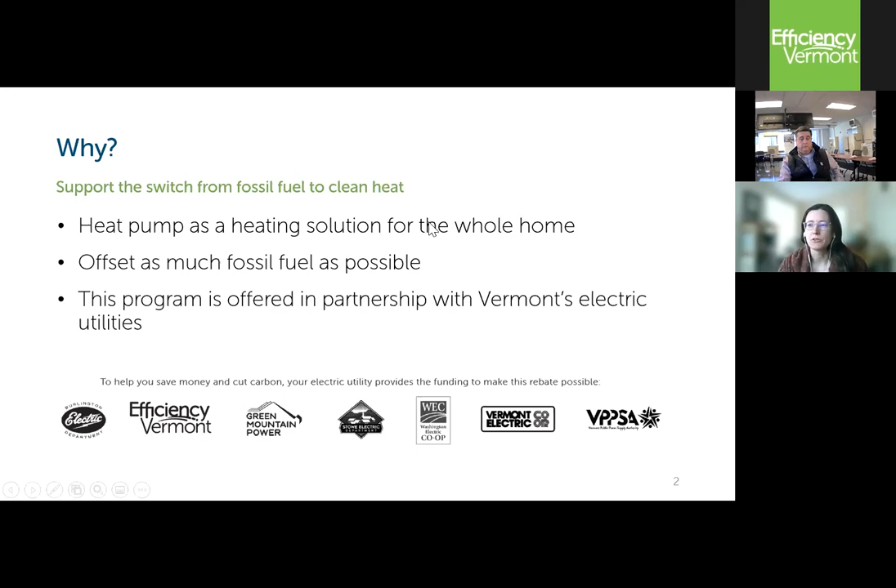First I'll start with some definitions so we know what we mean by integrated controls here. There are different names for that function - some folks call it auxiliary heat, and I think that's what Daikin uses. But what we've called integrated controls for this program are devices that can control both the ductless mini split and central heating system from a single device.

That device can switch between the two heating systems based on outdoor temperature or the temperature in the remote room away from the heat pump indoor heads, if that's needed to align with best practice guidelines. I went into that in more detail in the October webinar.

One thing I wanted to note briefly is that this rebate program is currently a limited time offer for 1 year or 100 rebates, which will likely get extended because we're off to a slow start. The hope is that with that limited time offer, we can get enough customer and contractor feedback to roll this into a full-scale program with a more streamlined approach around the rebate. I want to highlight this is a first step, and hopefully we can expand this into a more permanent program.

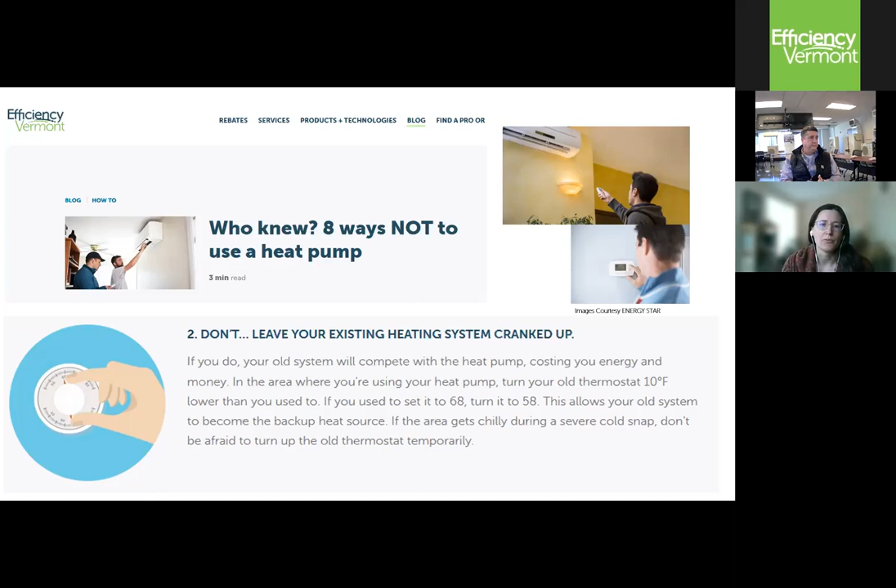You may think, I get what's in it for the utilities, but what's in it for the homeowners to tie that heat pump with the central heating system? Efficiency Vermont has a blog post you may have seen, 'Who Knew: 8 Ways Not to Use a Heat Pump', and tip number 2 is don't leave your existing heating system cranked up. Really, many Vermonters are not using their heat pump to its full potential for heating, and we can achieve more fossil fuel offsets by integrating it with the central heating system.

So the customer benefits in a nutshell would be, first, peace of mind. They can just set the set point on one single thermostat and not think about it anymore. The heat pump and central heating systems will take it from here.

The customer can feel like they're doing what's best for the environment, using the heat pumps as much as possible and reducing fossil fuel consumption. They also enjoy all the benefits of an internet connected thermostat with remote access, vacation mode, and all that. They can feel like they're the leaders using cutting edge smart technology.

One thing we can't really guarantee at this point is that they will be saving money. In most cases, from the calculations I did, it's pretty much a wash. In some cases, especially with natural gas, they might actually be paying more by using their heat pump more. So really the main benefits for homeowners will be peace of mind, ease of use, and feeling good about what's best for the environment.

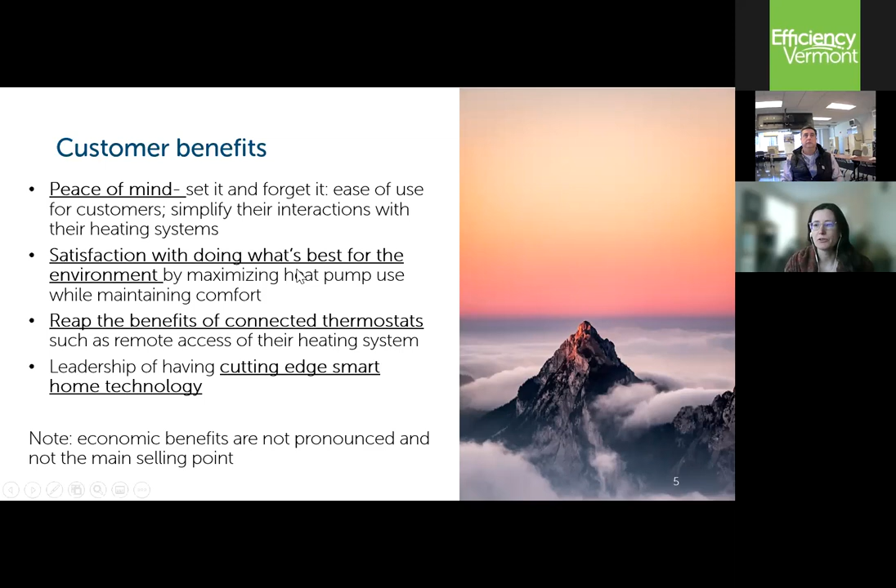So with this quick intro on why we're doing this, I wanted to dive into more of the details of the incentive program. The incentive that Efficiency Vermont is offering at this point is up to $600 per home to cover the device cost and installation cost. It's not $600 per thermostat, but $600 per customer. We ask that the customer pay at least $150 out of pocket, so they have a vested interest in the controls, that it's not a free device they got, but that they're interested in that control. The $150 is about the cost of a regular smart thermostat.

The incentive is currently for new ductless mini split installations, not for heat pumps that are already installed. And it's not available for ducted heat pumps at this point because that's already typically done for a ducted system, and we have a separate ducted heat pump incentive program. This is for oil, propane, or natural gas central heating systems. It's not available for resistance electric heat or central wood systems.

We also have a switch over temperature calculation tool, and I went into that tool in the webinar in October, so feel free to go back and look at that webinar for an overview of the tool. That tool helps you decide on a good balance point temperature for turning on the central heating system as a supplemental heat to the heat pump when it gets cold out, or if the heat pump can't keep up with covering the load.

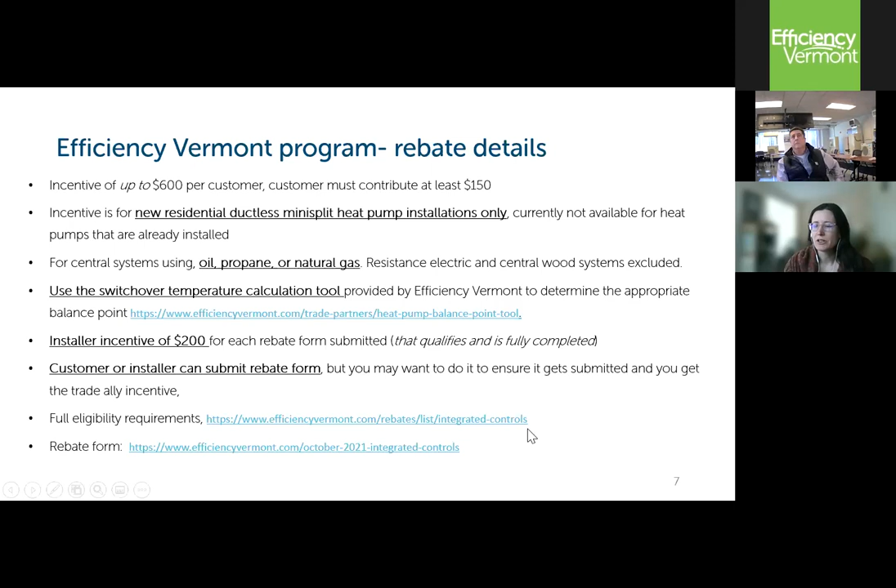There's also a $200 trade-ally incentive. So you can get $200 for each rebate form that you or your customer submits to Efficiency Vermont. Either you or the customer can submit that rebate form, but if you want to be sure that we get it, it might be better for you to submit that form so you can be sure you get that $200 incentive. I have a link to the full eligibility requirements here and a link to the rebate form, and I'll put those links again at the end.

Because this is kind of new, having those integrated controls where the heat pump and the central heating system talk to each other, we want to make sure we see quality installations, the customers are satisfied, and we get a good start to this new market. So we want to make sure that installers receiving the Efficiency Vermont incentive have followed trainings regarding the program, what we consider best practices for installation of the heat pumps, and really understand what are the risks and what makes a good installation for those integrated controls.

So to verify those trainings were followed, we're doing this through the EEN. If you're already an EEN ductless heat pump installer, you can follow the overview training that's linked on that webpage. If you haven't already, there's a really short quiz at the end that you can verify that you've attended it. I think it's 45 minutes total, the training, so it's pretty quick.

And then you would follow manufacturer's product specific training for the product you installed. This training you're in right now is one of them, so you'll have already done that piece. And then you would complete the EEN enrollment for integrated controls.

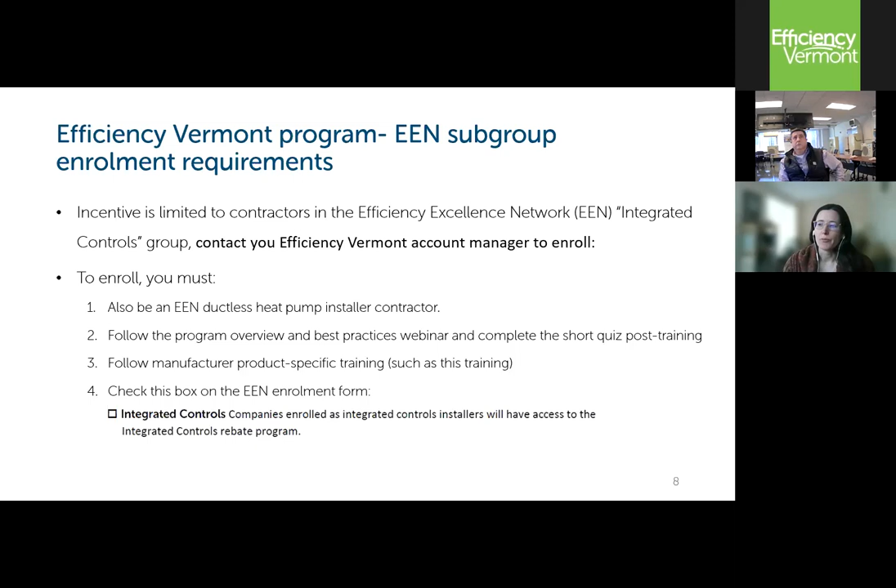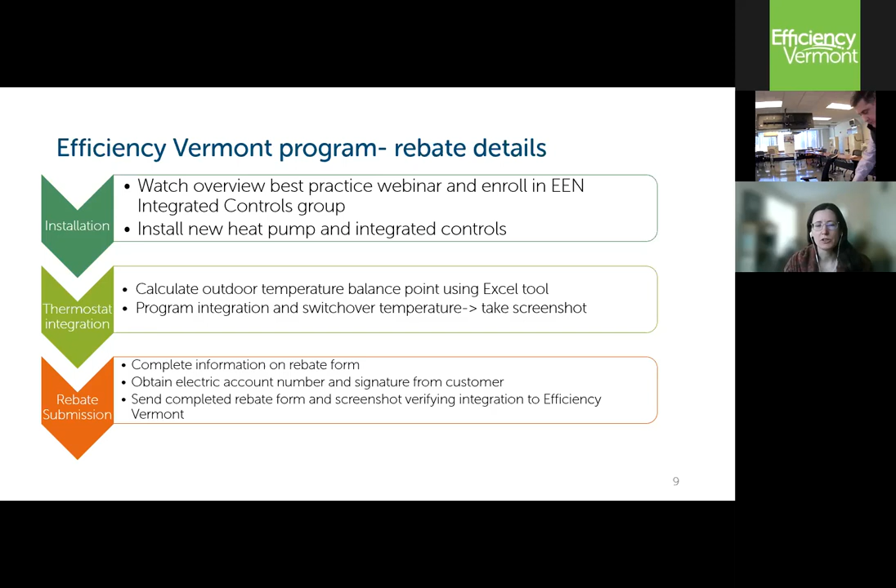So once you enroll in that EEN integrated controls group, to get access to the incentive you would install the new heat pump with the integrated controls, look at the appropriate balance point using the Excel tool mentioned earlier, program that integration in the thermostat, take a screenshot, then complete the rebate form and send it to us. You'll need to get the electric account information from the customer and their signature on the form, then send the rebate form to us with the screenshots. That's what you need to get the incentive either to the customer or to you, which is something you can choose on the rebate form. And you would also get your $200 trade ally incentive.

In terms of product eligibility, we've been focusing this incentive program on integrated controls that can communicate a demand call both to ductless mini split heat pumps and to the central heating system, prioritizing one over the other based on the outdoor temperature or the remote room sensor when indicated. We're also focusing on integrated controls connected to the internet so we can enable future demand response programs with the utilities. We're aware there are other options to do integration between the heat pump or central heating system, but we really wanted to focus at this point on devices that are connected to the internet. For full product qualification criteria, you can go on this webpage.

I just wanted to flag that the Daikin One Plus, which we're going to be talking about in this presentation, is definitely a product that qualifies for the program. Tom will go into more details on that, and that's it for me. Again, the link with most of the details on the program is here, and feel free to reach out if you have any questions.

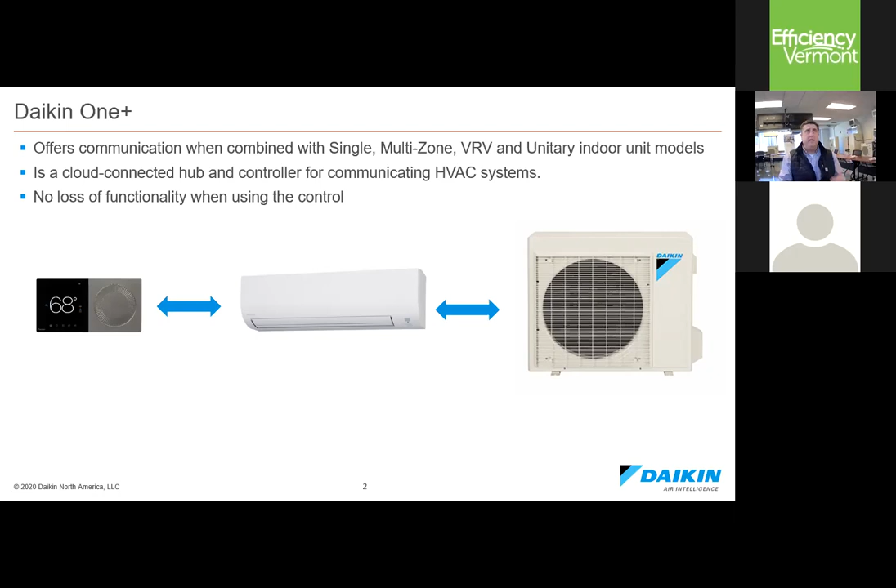So some of the other things we wanted to do when we developed Daikin One was to give a lot of the features and benefits that a lot of people may be looking for. Geofencing is a big one right now. Being able to use Amazon Alexa or Google Assistant is important to some people. Error codes that make sense, that pop up on the screen and will actually give a description of what may be wrong.

Remote access from the app is one of the biggest things, right? We are able to take a phone app and mirror the controller. So almost everything I can do standing in front of the controller, I can do from the app. It's just kind of cool. And again, we want to do that without losing any functionality of the control.

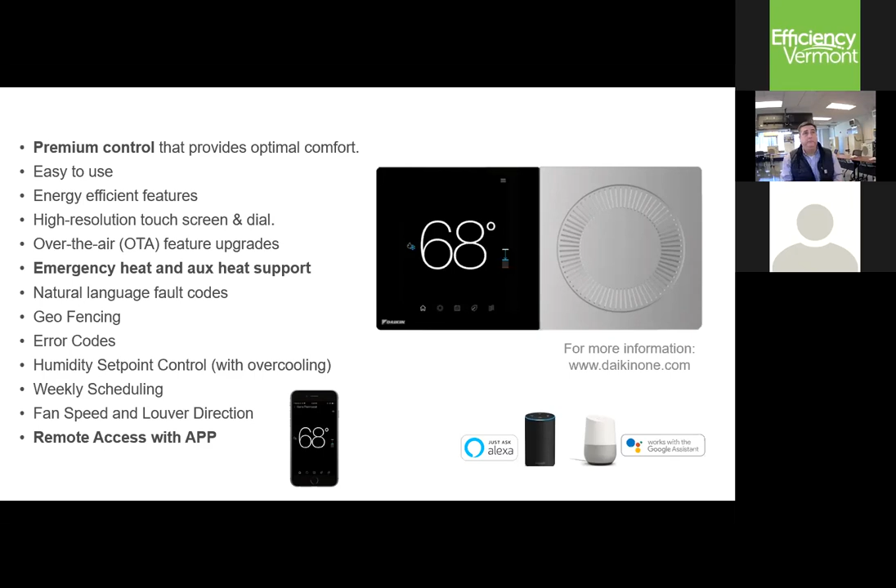So along through this presentation, I'm going to talk about S21 and P1P2.

These are two different types of how the controls wire. S21 control, the best I can describe it, uses a Molex connector on a set wire that'll plug into the S21 terminal on the board. Most of our wall mount units in our ductless and multis, you're going to see this in the floor mounts, the Emura. We also have our low static ducted, that's an S21 control.

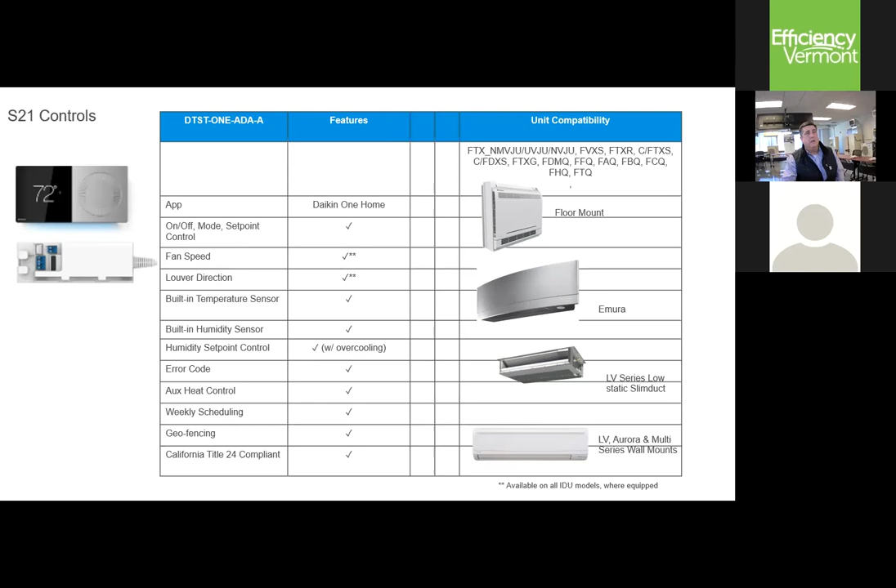I'm also going to talk about P1P2. P1P2 means you have two wires running between the controller and the indoor unit. They should be 18 gauge stranded non-shielded cable between those two connections. So P1P2 is a 2-wire connection, not a Molex connector. You'll see that in our ceiling cassettes, mid-static ducted units, in the Sky Air line, our VRV line, and our VRV Life line. You're going to see the P1P2 controllers there.

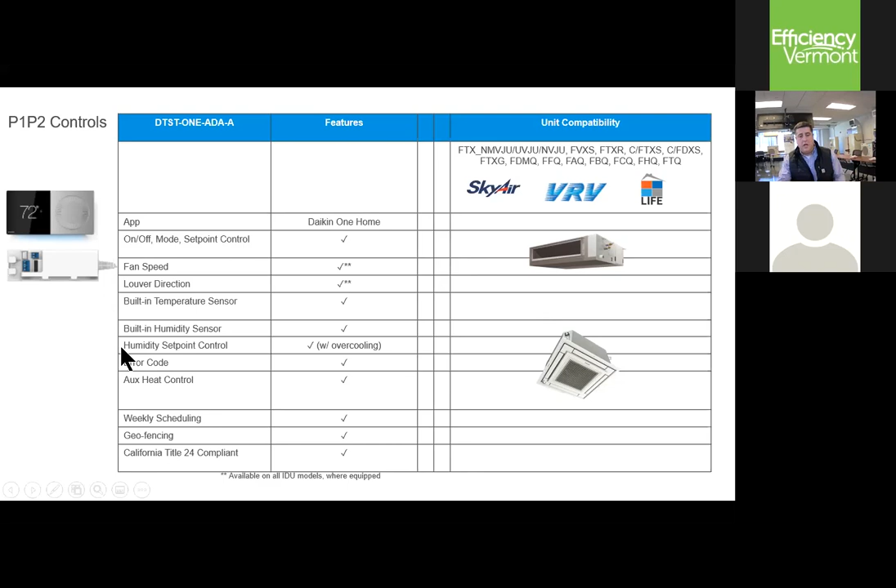When it's used in the unitary products, you won't need S21 or P1P2, because we have an adapter, I'm going to show that in a second, that will be able to help tie this into everything across our line.

So the controller has two ways of controlling. There is a dial, so that this area right here spins, and you can turn the temperature up and down. You can press it, and it will bring it to the home screen. So that's one way to be able to change temperature and change the settings.

The other thing you can do is come up to the controller and just touch the screen. The look is a little different. You used to have to go in and click this little round thing that mimics the dial, touch it, and be able to change temperature up and down. If you tap the screen now, it'll bring you to a screen where you can change temperatures up and down just by dragging your finger. You can also touch the mode, right here, and change your mode to heating, cooling, or auto. It's pretty simple and easy to use.

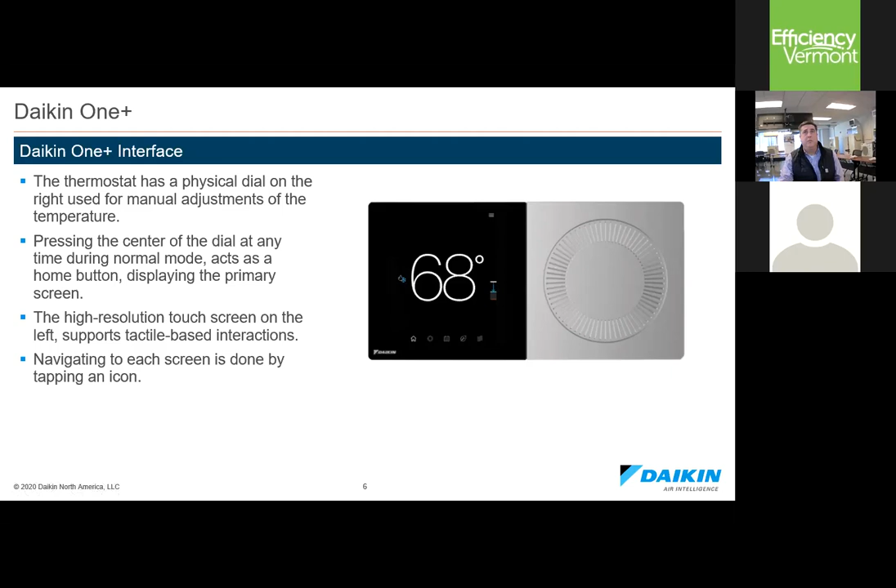You'll have 4 types of messages, and they come in different colors so you can differentiate them. When you see red, that's your status - what is the system doing right now? Alerts are going to be in yellow. White is just a reminder or a prompt, asking what you want to do next, especially in setup. And in a grayish look, you can click on that and it'll give you tips and suggestions on how to use the control to optimize it for your application.

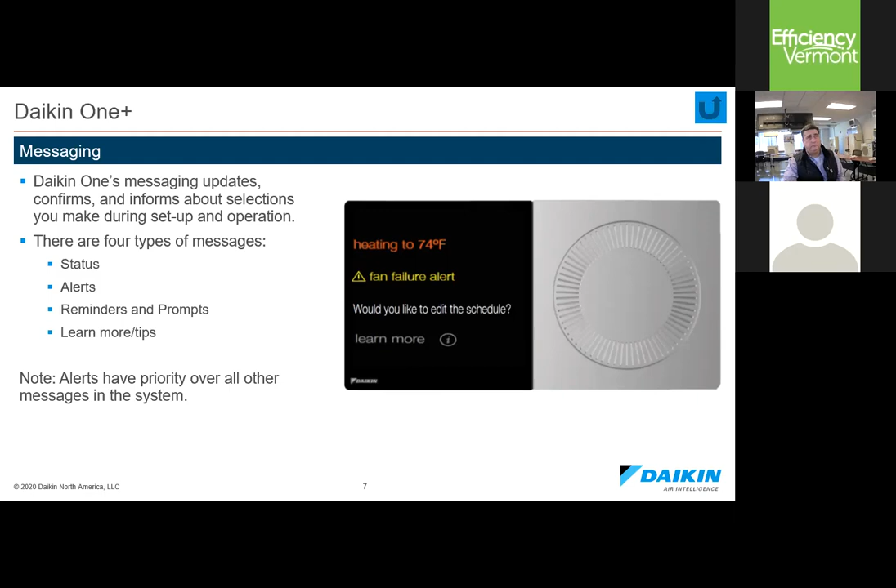A lot of the alerts that might pop up, the homeowner might be able to just dismiss. Obviously there are some prompts, like the fan failure that popped up on the screen there - if the fan has actually failed, there's nothing we can reset, they're going to have to call and get it fixed. But there are some minor faults that will pop up and you can just reset the system and continue on.

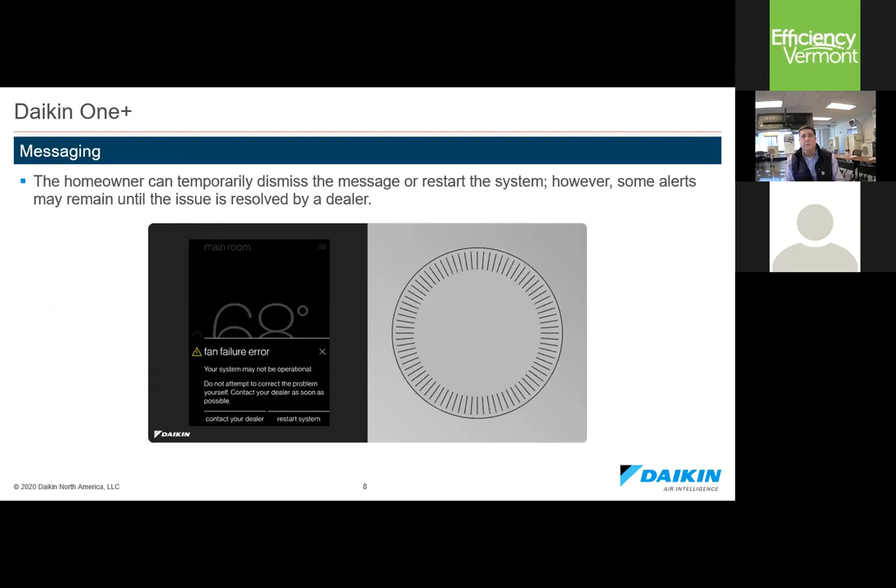So in the box, you're going to get the Daikin One stat. You're going to get a backplate for it. You get an optional trim plate. What you also get is the translator.

The translator, and I'm going to show you how to wire it in a minute - this translator will be able to translate to that S21 or P1P2 connection. That comes in the box along with the S21 cable, because that is just a Molex connector. When you use P1P2, you'll use non-shielded 18 gauge stranded wire between the translator and the indoor unit.

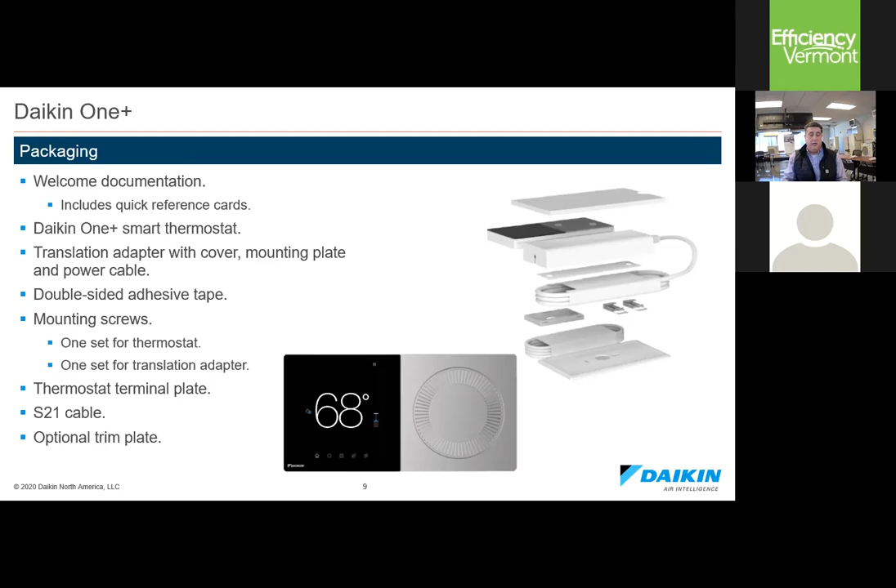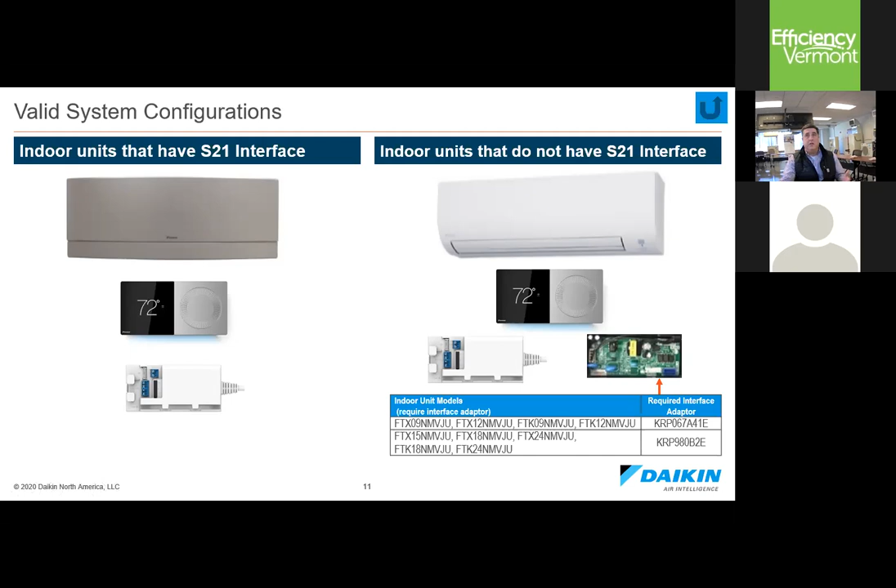Most of our wall mounts have an S21 interface. There are some units, like our 17 series, which do not have an S21 interface. With those, you're going to have to add a KRP board to the indoor unit to be able to tie directly into the S21 off of the translator. But most of our indoor units that you'll be installing will tie directly with an S21 clip.

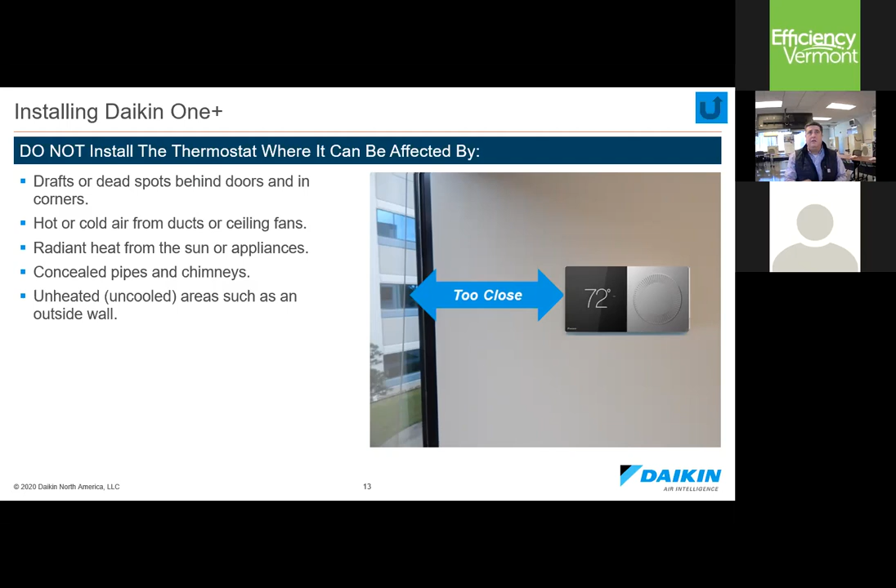So installing the thermostat - common sense, right? We don't want it with a light shining on it. We don't want it close to the TV. Any sources of heat that might affect the operation of the thermostat. We want it on an interior wall, not an exterior wall. Simple things - you guys have been installing thermostats for a long time probably, and the same rules apply to this controller.

About 5 feet off the floor. You may have some restrictions that might need it lower. It should be leveled - it'll operate without being leveled, but you want it to look nice and straight.

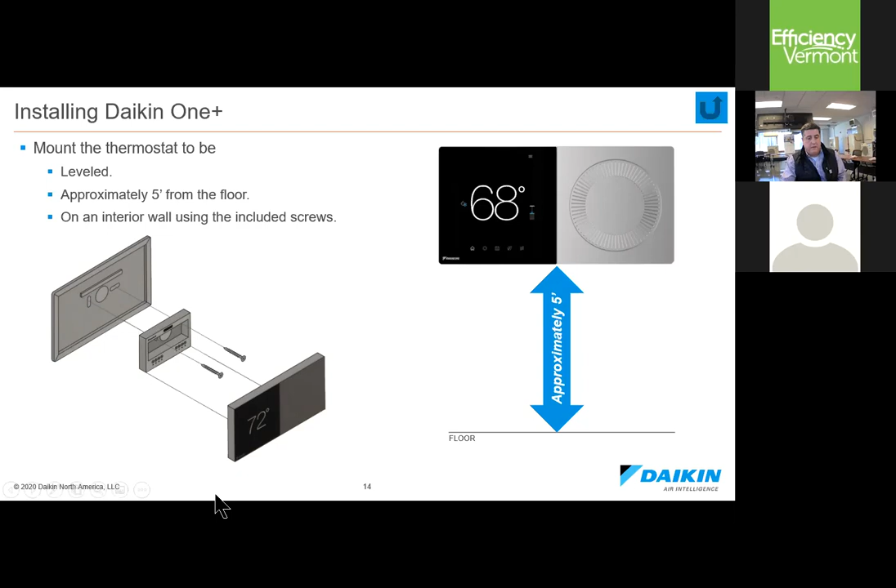The question we always get is, where do I put that translator? You can put it above the unit. You have a 6-foot cable for S21, so it would have to be within 6 feet from the indoor unit. It will mount in the pipe chase back here in a wall mount unit.

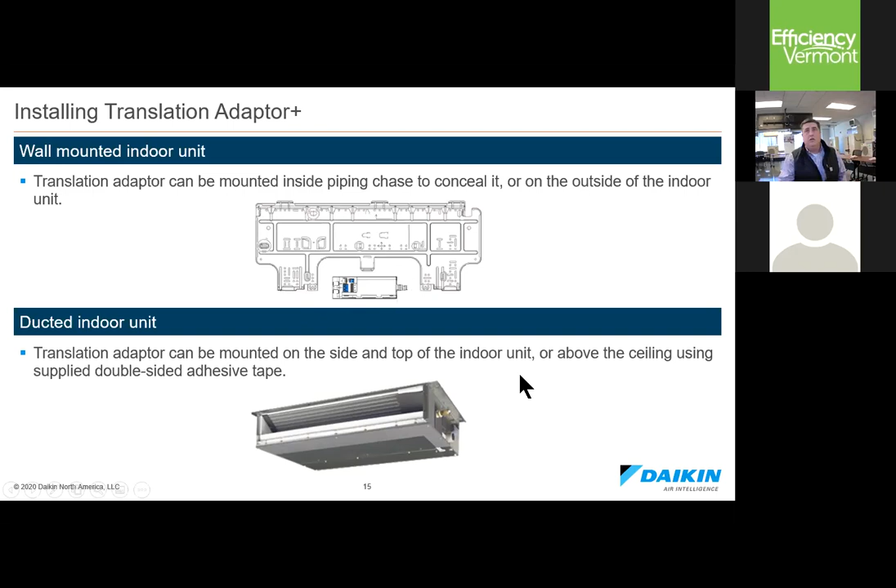A typical duct mounted unit, you're going to mount it - there's double-sided tape that you can use to mount the translator adapter to the ducted indoor unit. Again, we don't want you putting screws in the indoor unit. We don't want to let any gas out or any smoke out of the board by drilling into the wrong spot on the air handler. It does come with adhesive tape - you're going to put it on there, push it on, apply pressure for about 20 seconds, and you should be good to go.

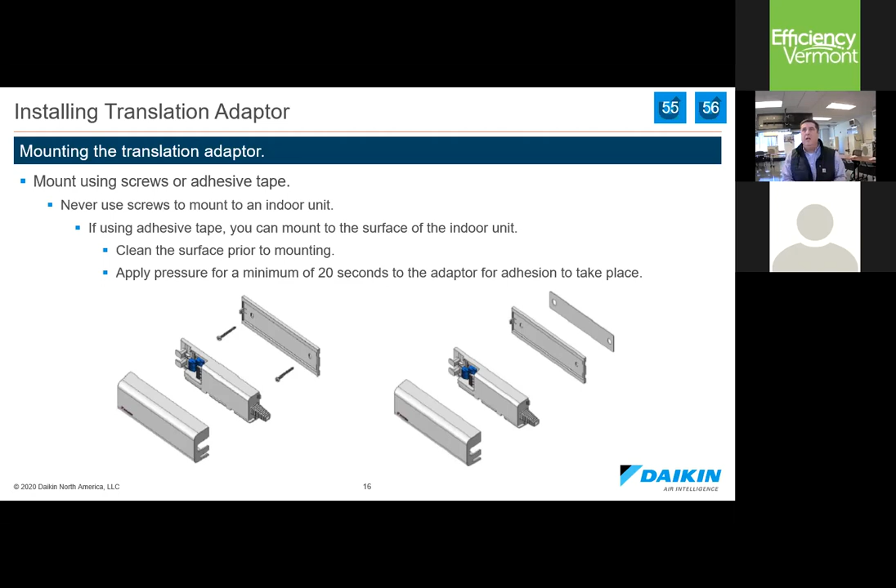The Daikin One does have some restrictions as far as the amount of wire we can put on it. The maximum distance between the Daikin One and the translation adapter shouldn't be more than 125 feet.

One thing you typically don't hear from us in the ductless world is that when you go from the thermostat to the translation adapter, you can use solid wires. You can use typical 18-gauge thermostat wire between the thermostat and the translation adapter. In fact, it works better. These connections are a little tight, and when using stranded wire, you really have to twist it tight to get it into the hole where you're tying it in. So solid wire actually installs a little easier.

When you have the whole thing wired and powered and ready to go, one thing you may want to check is that you have 0.6 volts DC between 1 and 2, your data lines. And then that you have 24 volts DC between R and C. You just want to make sure that you have that there to verify your wiring, because you don't want to get the whole thing ready to go and then find out you need to run new wire because of a problem with the thermostat wire that may already be in the wall.

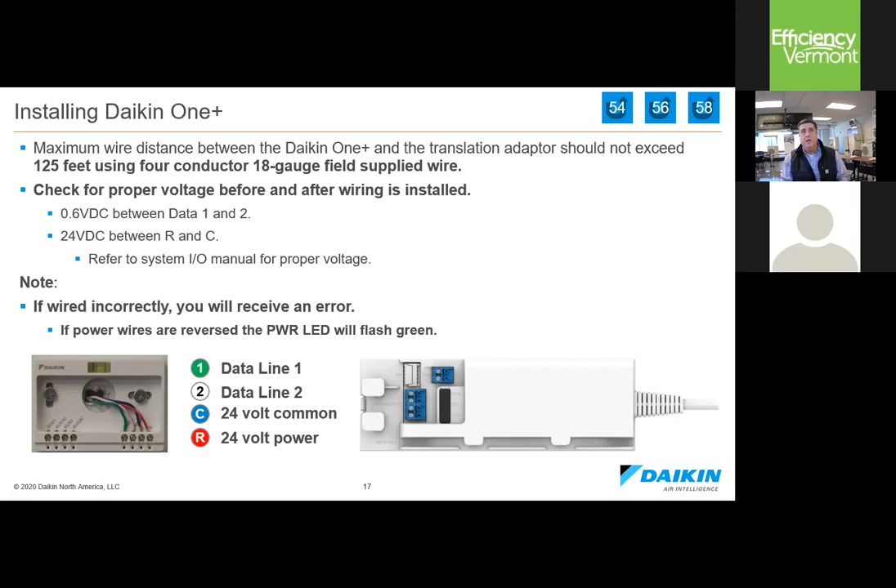This is showing the S21 connection. We're tying into the indoor unit here with our line voltage. We have our 4 wires running from the Daikin One plus the translation adapter. Then from the translation adapter, we have the Molex connector that will snap into the S21 connection on the board.

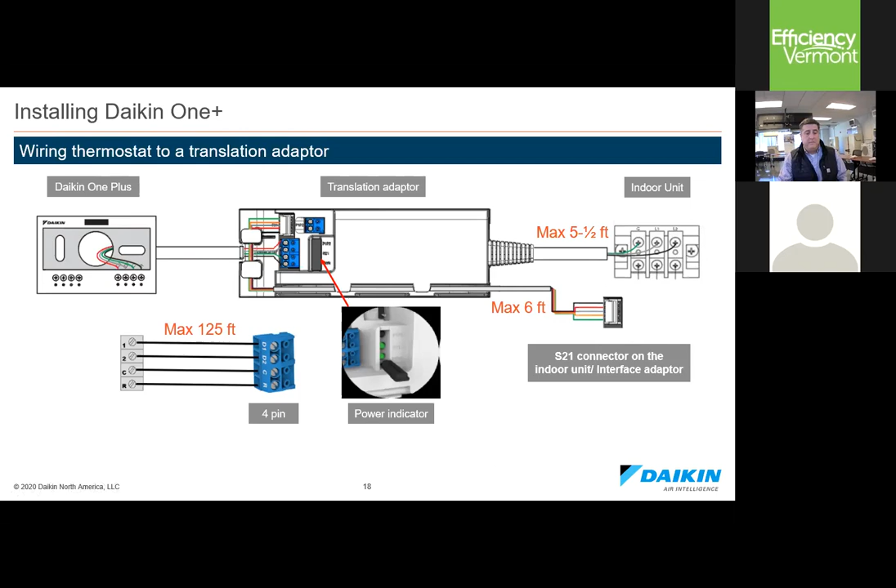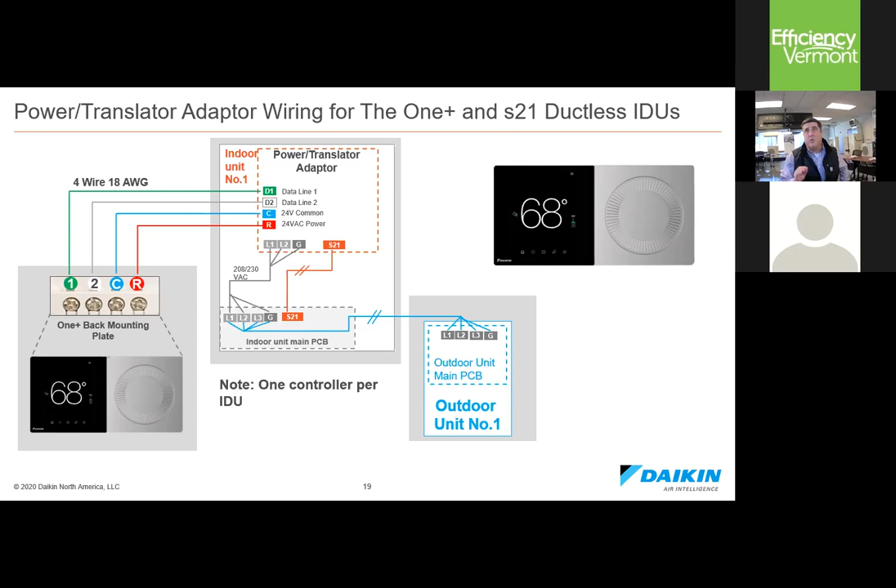Just another look at how the translation adapter and the whole thing is wired on an S21 application. Especially in an S21 application, you're going to want 1 thermostat per air handler. Even in P1P2, we recommend that. It can be done with 16 units, but that may get confusing within the install, making it a little more difficult for the homeowner to understand the control of it.

There's line voltage, P1P2, 2 wires tying into a unit from the translation adapter. And again, a maximum of 125 feet of 4-wire, 18 gauge going from the thermostat to the translation adapter.

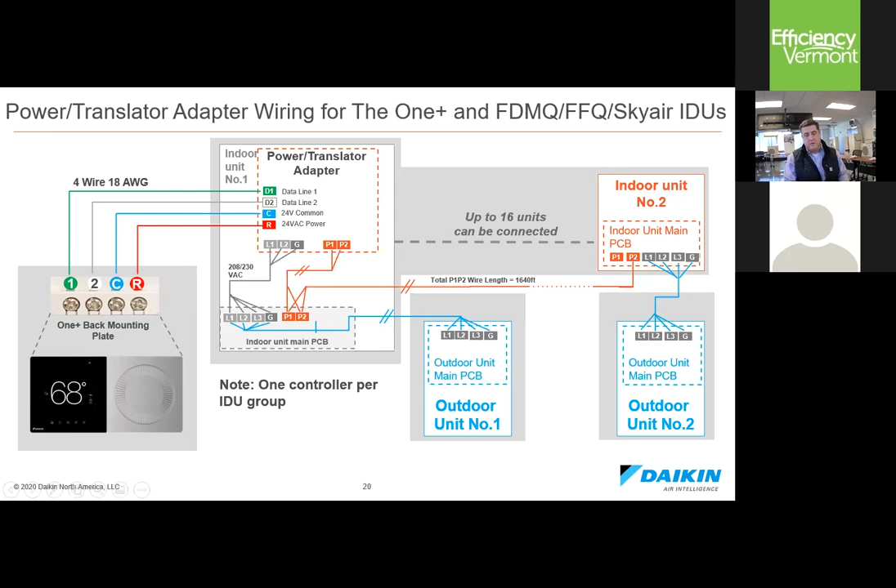So I guess this is the reason why we're here, right? To talk about how we will wire this in as an integrated control.

The great thing about Daikin One is that we made this extremely easy to do. On the sub base, there are auxiliary terminals, auxiliary 1, 1C, 2, 2C. All you're going to do is tie these in. Basically these contacts are just a set of dry contacts, no power to them. They're going to open and close based on the parameters that you put into the controller. We're going to show that in a minute.

We're going to tie this directly to the auxiliary heat, whether it's the board or the boiler directly, a furnace, whatever it is. This could be a hydro coil, whatever your backup heat is going to be for your auxiliary heat. That's all we're going to do, use this set of dry contacts to tie that together.

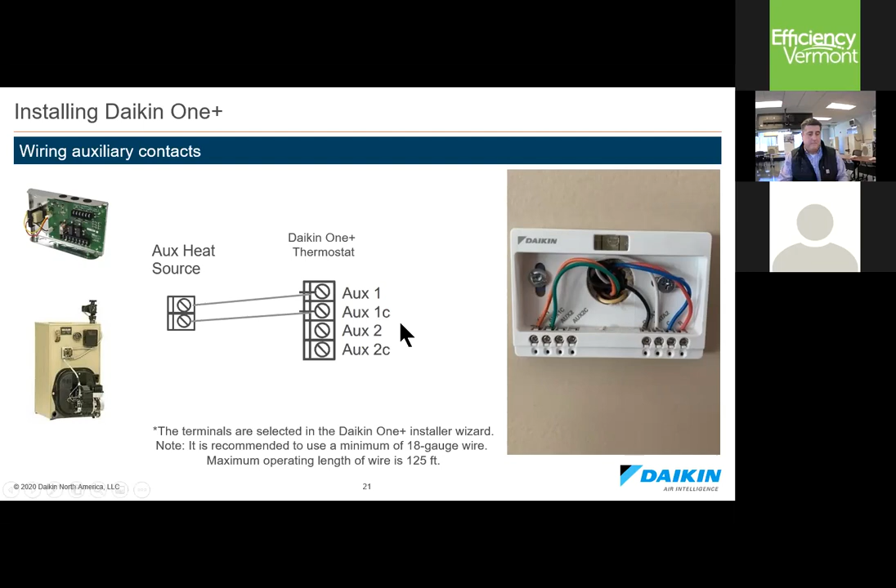Just a second, I'm clicking a little too quick here.

So any questions at all on wiring? It is pretty simple to wire. There shouldn't be any surprises with it. It's pretty cut and dry.

Okay, so the commissioning of the control. The other thing I really like about the Daikin One controller is how easy it is to go through the setup, because it's going to prompt you through. It's not going to be like our typical VRV controller we've had for years, where you need a certain code and try to figure out how to work through that. This is going to be a lot easier, in clear language on how to set this controller up.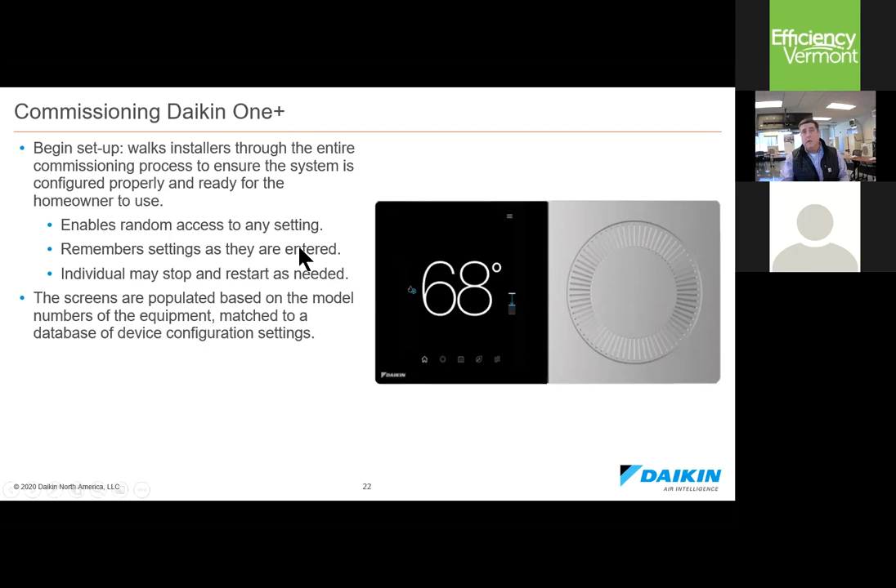Upon startup, it's going to walk you right through the process. It's going to ask you the language, if you want to use large font. It's also going to ask you what type of equipment, and this is important when we talk about the S21 versus P1P2. If it's a unitary piece of equipment, a standard furnace, or one of our Daikin Fit units, you're going to click unitary. If it is typically a wall mount, something like that, it's going to be S21. If it's P1P2, you're going to click on VRV, Sky Air, P1P2, just so the controller knows what signal it's going to have to put out there.

And easily click, begin setup.

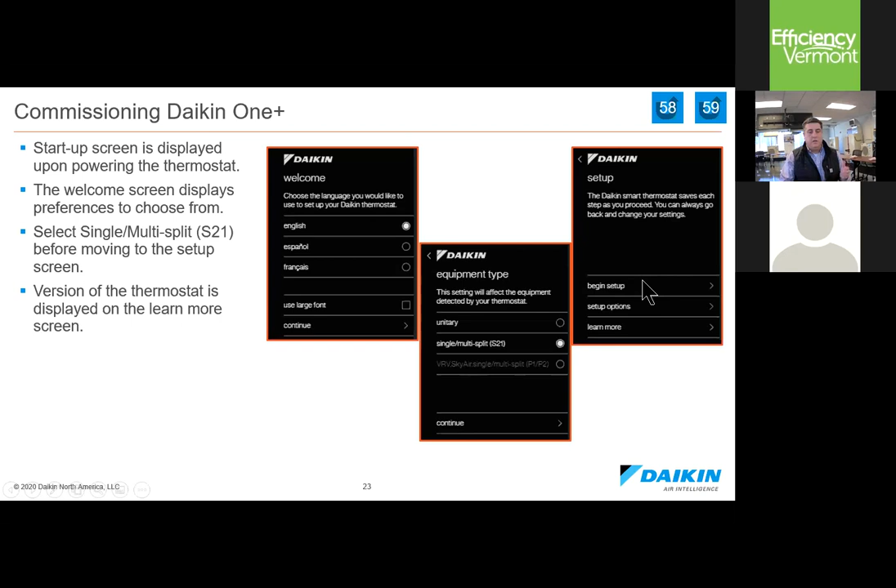From there, it's going to give you a 5-step process. As you go through this process, there are going to be check marks that check off each one: communication, personalization, equipment setup, system optimization, and preferences.

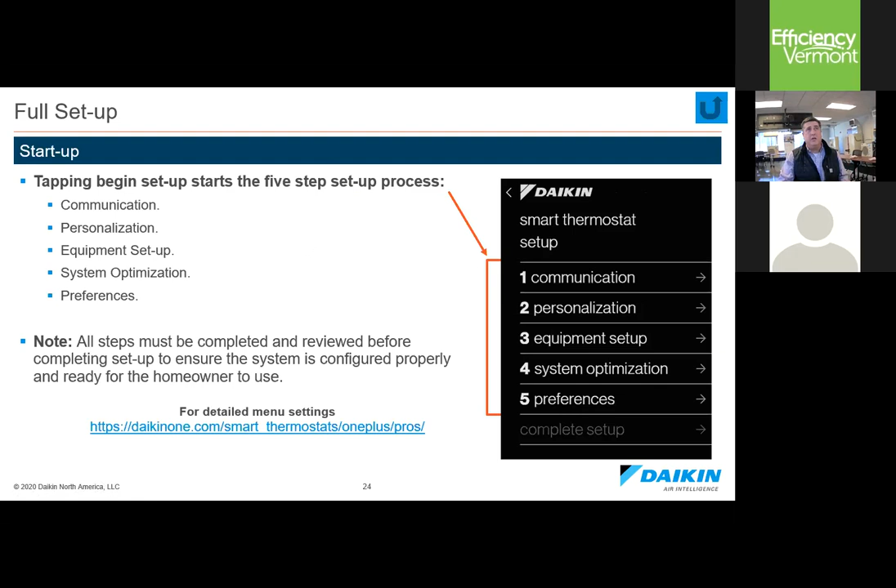So you want to start with communication. The first step you want to do, and I know some installers want to just go ahead, get the equipment running and move on, but it's important that we go in and set up the Wi-Fi first. The reason we want to set the Wi-Fi first is that if this controller has been sitting on the shelf a while, it doesn't have the latest software version. Once we tie this to the internet, it'll go out, look for its updates, and automatically update to the latest version. We want to make sure we have all the functionality, all the features and benefits that we could possibly get with this controller.

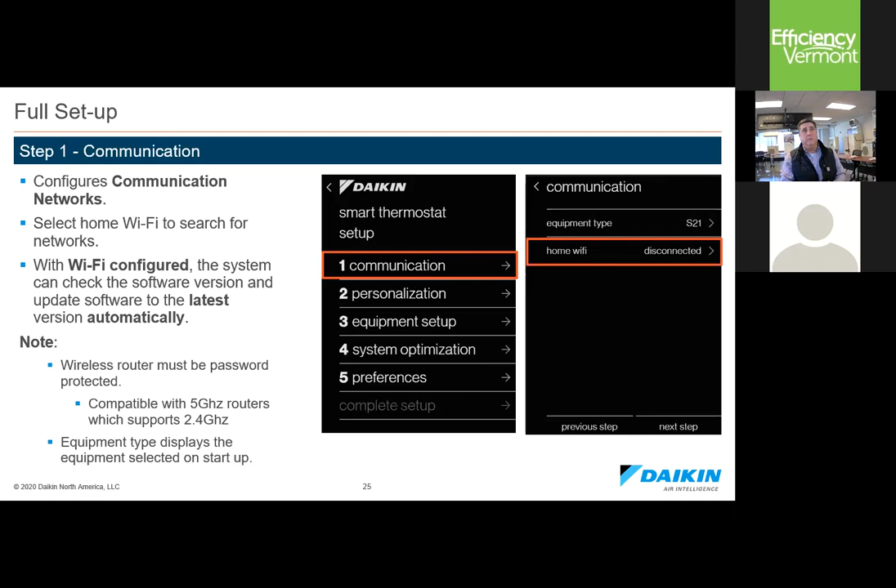You go to personalization. You're going to set your language. This is where you're going to set your date and time, to make sure that when they do the scheduling, it all works properly. You can name the controller, and you can set Fahrenheit or Celsius right here.

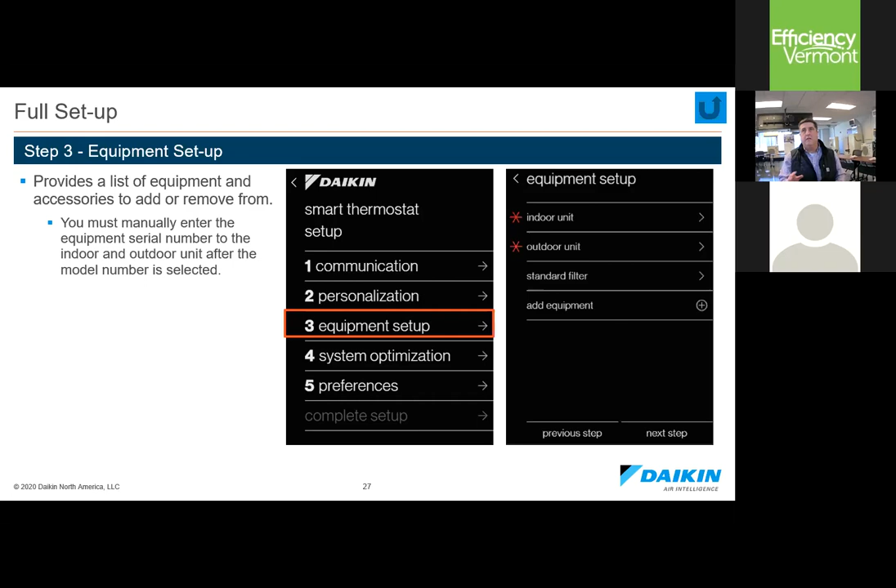When you go to this setup screen, it should tell you the model numbers of the indoor and outdoor unit. If it does not, you may have a communication error or communication problem, and might have to go back and check wiring, but it should pick it up. The one thing you do have to do is enter the serial number of the unit. That is not picked up directly through the boards, so you will have to put that in there. Then hit next step. So again, indoor and outdoor unit, add the serial numbers.

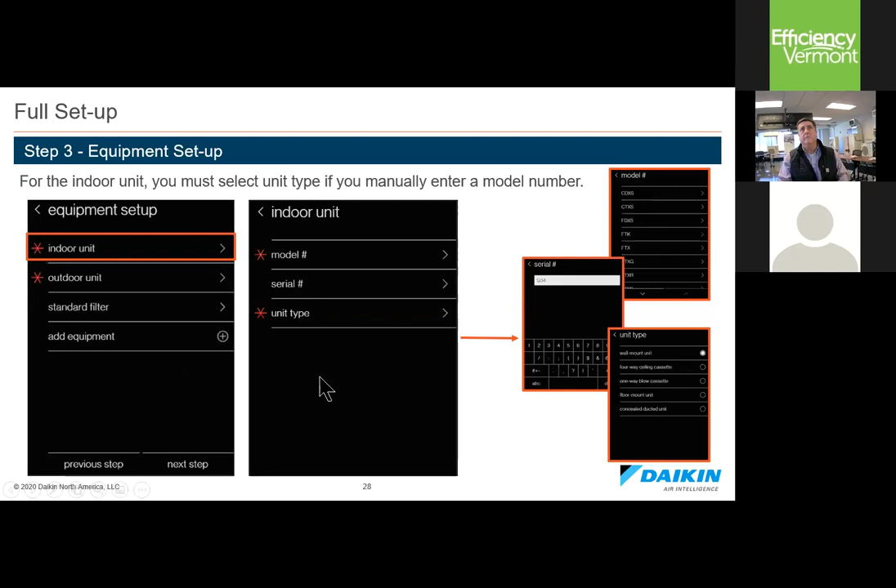So now we're going to come to this screen for add equipment. This is where we're going to set up that auxiliary terminal. We'll go in, click add equipment, and pick what we want to do—we want to pick auxiliary heat source. You can pick at this point if the heat pump is a primary source of heat or a secondary source of heat. It is possible—I've seen some applications where someone might have solar hot water that they want to heat with, use that as the primary source, and have the auxiliary heat pump as a second source. Then we can set up another source with the aux2 terminals to set up another layer of auxiliary heat sources.

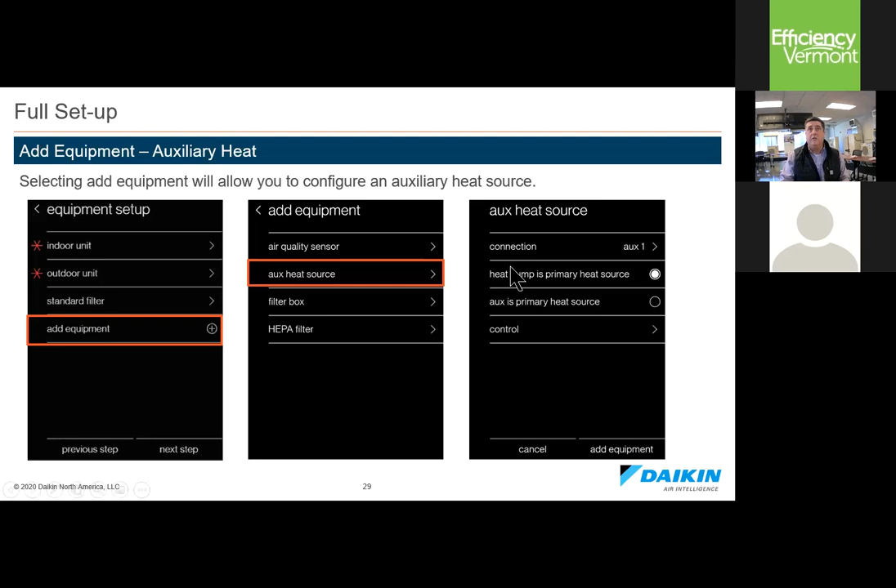So we're going to go in here and it's as easy as this: heat pump lockout, set it up, auxiliary heat lockout, and the differential you want to set up. It is absolutely that simple.

Hit next, you go to the next screen, system optimization. You're able to calibrate the stat at this time, but I would wait—we recommend this—at least 30 minutes. Let the thermostat equalize, let it figure out some things about the house and what it needs to do before calibrating the stat. But it can be calibrated through this screen. This is also where you're going to go later on to look at your error history. You'll be able to come in here to system optimization and look at error history.

Then in preferences, you can set up optimize performance, put in dealer information, and set up reminders. We can put our set point deadband, to differentiate when we get in auto mode—do we want a 3-degree difference between heating and cooling? We can set that up here. We can also set up overcooling to dehumidify—based on, say, a humidity over 60%, we can set this up from 0 to 3 degrees to overshoot the space to add a little more dehumidification just by overshooting the temperature. That can be adjusted here.

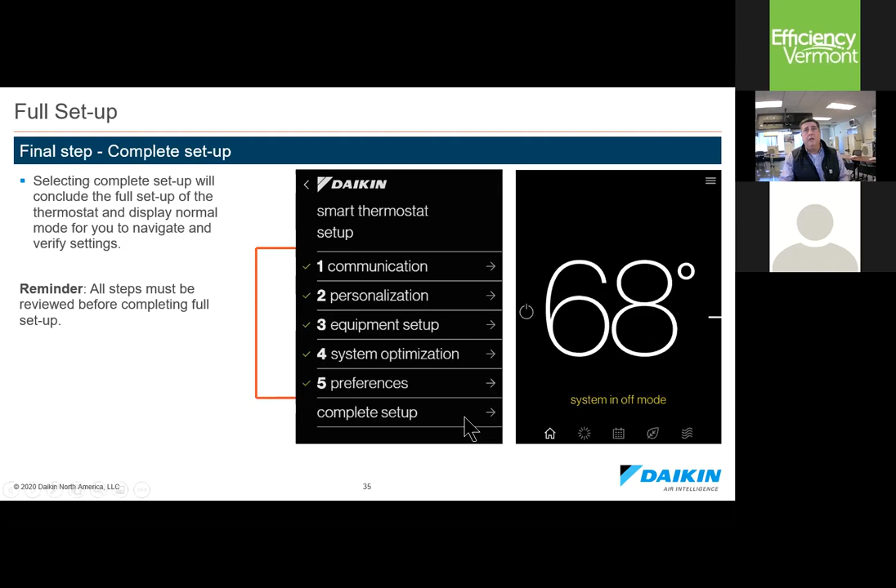So again, when I'm going through this controller, I would make sure that I go from top to bottom. You don't want to go back and try to figure out, okay, where did I leave off, what didn't I do, right? Try to go through it, 1 through 5. It doesn't take very long to run through the whole thing. Then you can hit complete setup, right?

So you hit the setup, you're done. Either you want to go back later and change something, or you're standing right there and say, oops, I forgot to do something, right, I want to change something. You'll go in up here. I believe it's over on the other side now, the waffle, this little waffle up here. You click on the waffle, you go into settings, and you can click configuration, dealer edit, and then hit continue.

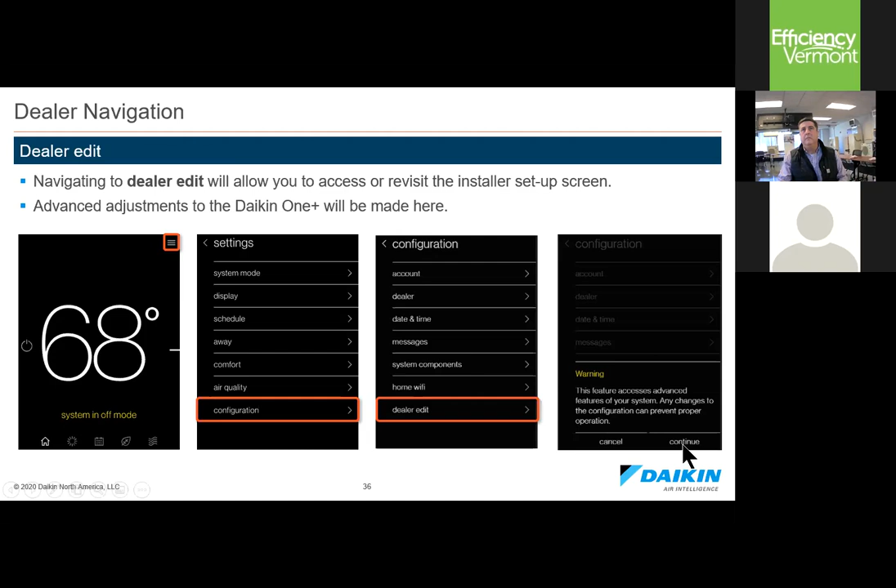It's going to ask you for a 4-digit PIN to unlock the thermostat. If you don't know or remember what this is, you come up here and hit this little icon to the right-hand side, and it'll give you that code. You put it in here, and you're back to the thermostat setup screen.

So if you wanted to go in and change any of the temperature changes from heating to cooling, right, if you decided that they want to optimize it and do it at a different temperature, optimize savings or whatever, whatever you want to do, you can go back in later and set that up.

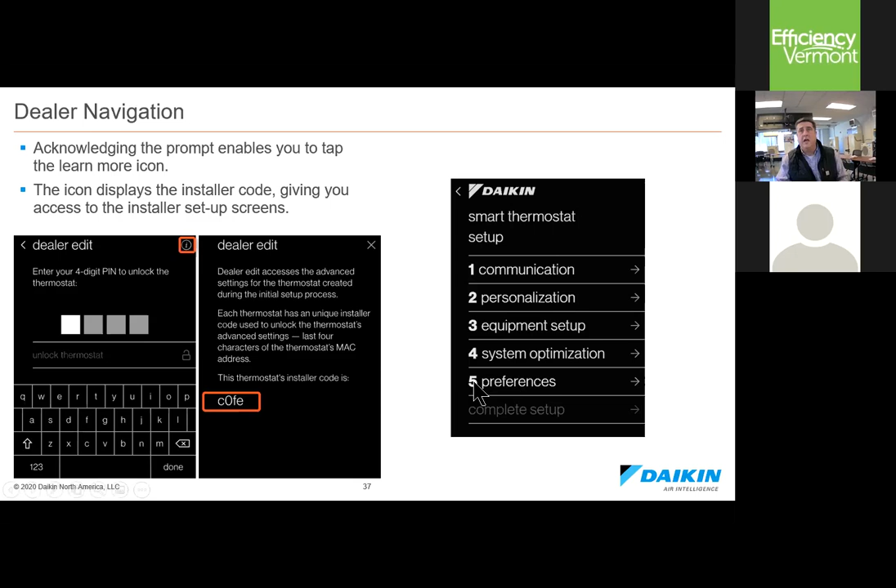All right, so when it's just running in normal mode, it's going to look like this, right? They can navigate the controller then by going up and just touching the screen. I should have an updated picture of this, it looks a little different. So now, let me go back.

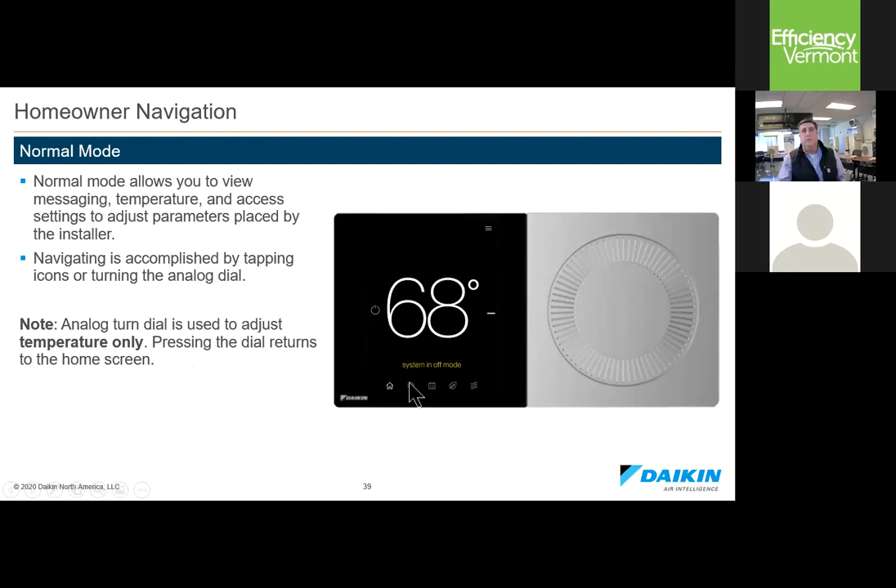Now when you go up to the screen and touch the screen, right before you had to go in and click this little button, this little icon here, right? You have to touch it. Now, if you touch the screen, it will bring you directly to this screen here, and you can automatically go up and adjust temperature up and down. And like I said, you can go and touch this little icon, and that will be able to change your mode from heating, cooling, or auto.

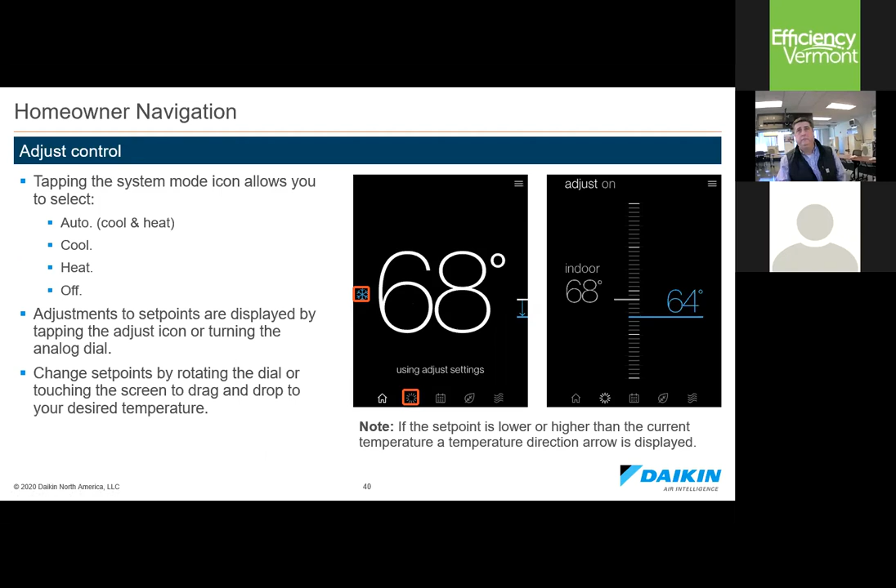This is your away screen you'll be able to go into, and this is where we can set up geofencing. So when we are away, and your phone senses that the app senses you're beyond the circle that you're going to put in for geofencing, this is where you'll be able to set your temperatures for the away mode.

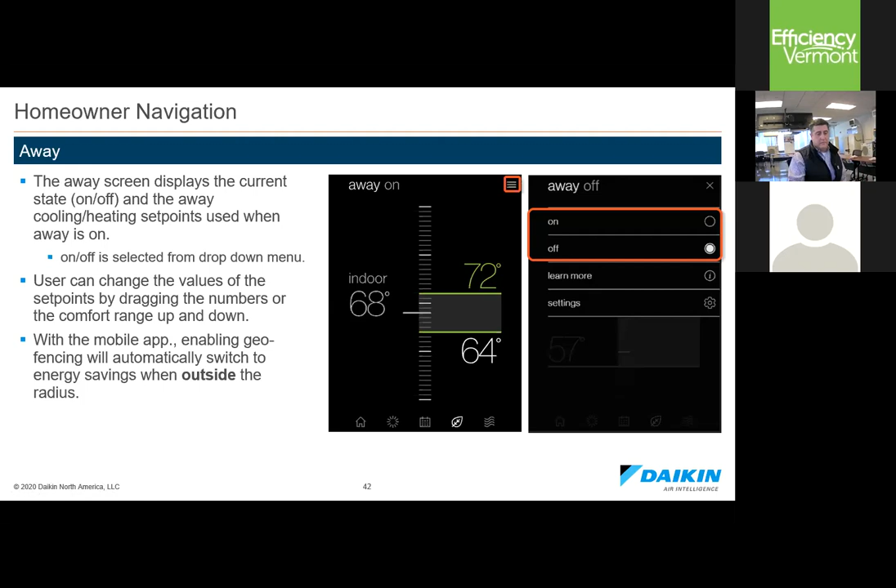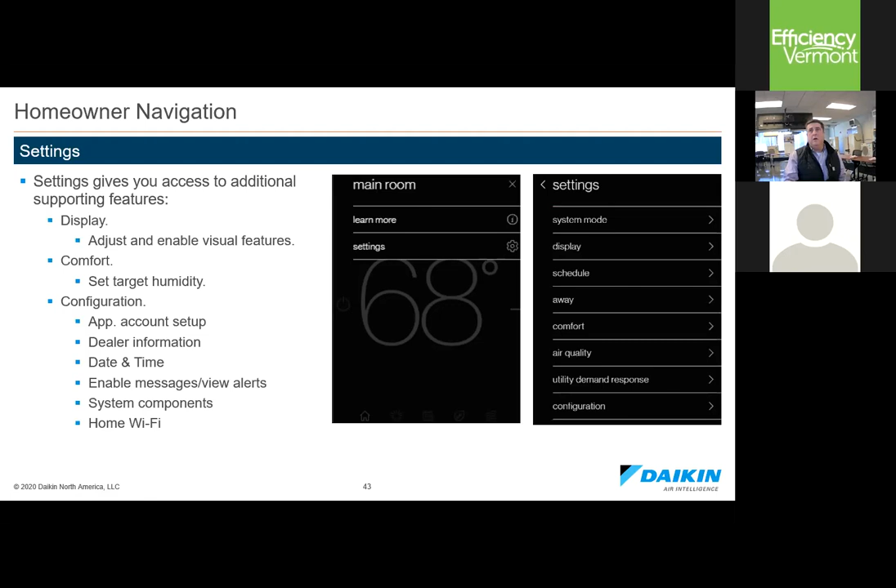You'll be able to go into settings, and just like you could before, right, but when you go into configuration. I'll show that. One thing the homeowner is going to want to do is they're going to want to first download the app, make sure they have the app on the phone. Most installations that I've been on shadowing, the homeowner already has this ready to go. They know what it's going to do, and they're ready to go with it. It's already downloaded on their phone. But you want to go to one of the app stores, download the Daikin One Home app.

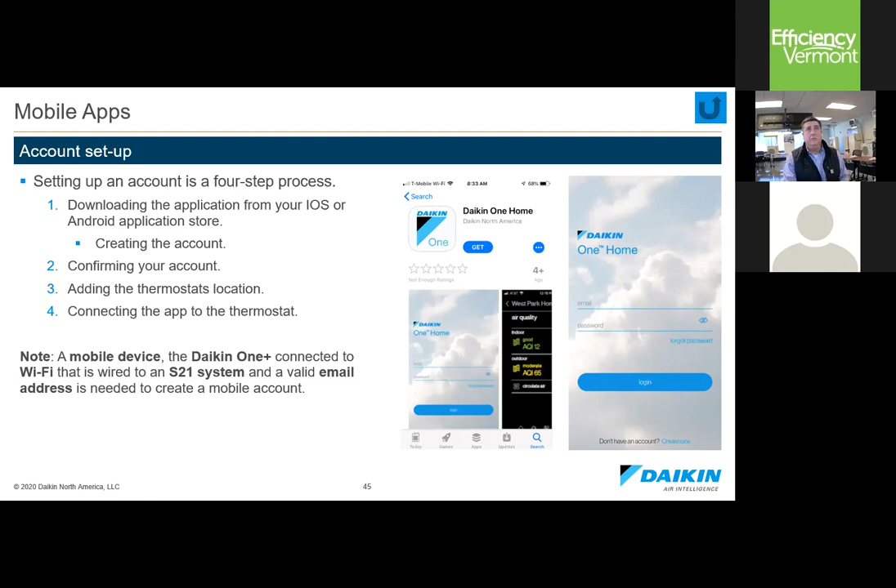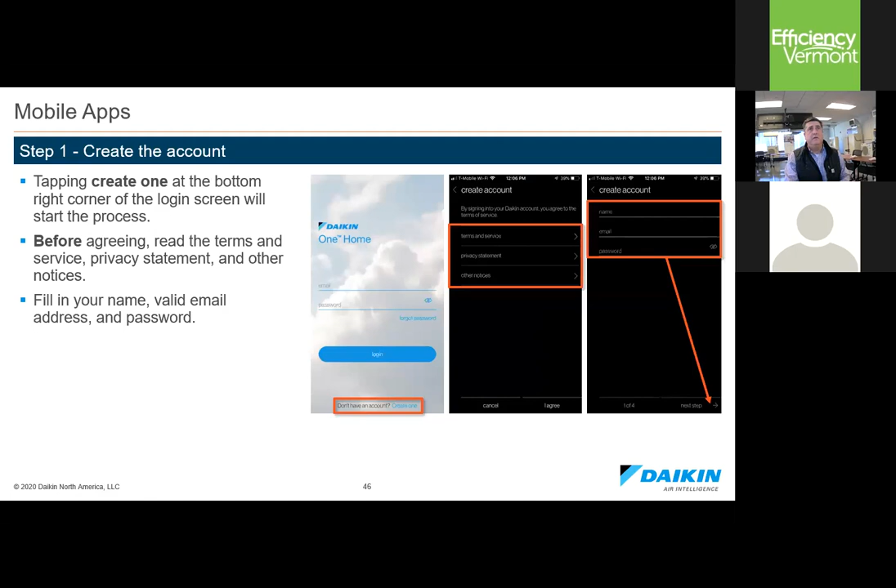This is the app where they're going to be able to set up. They're going to go and create an account. They're going to read the terms, sign off on it, set up their valid email and passwords. They will be prompted, right? They were prompted to an email to give them the code they're going to put in.

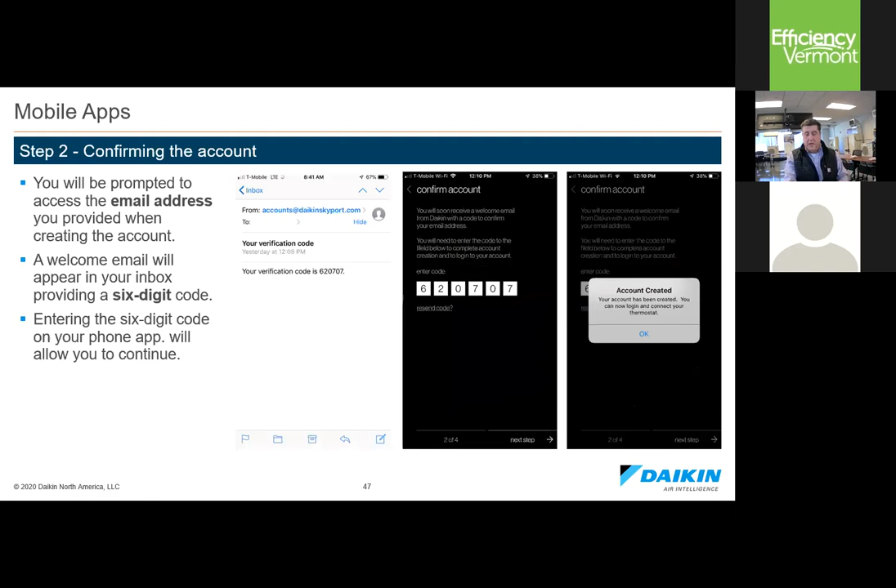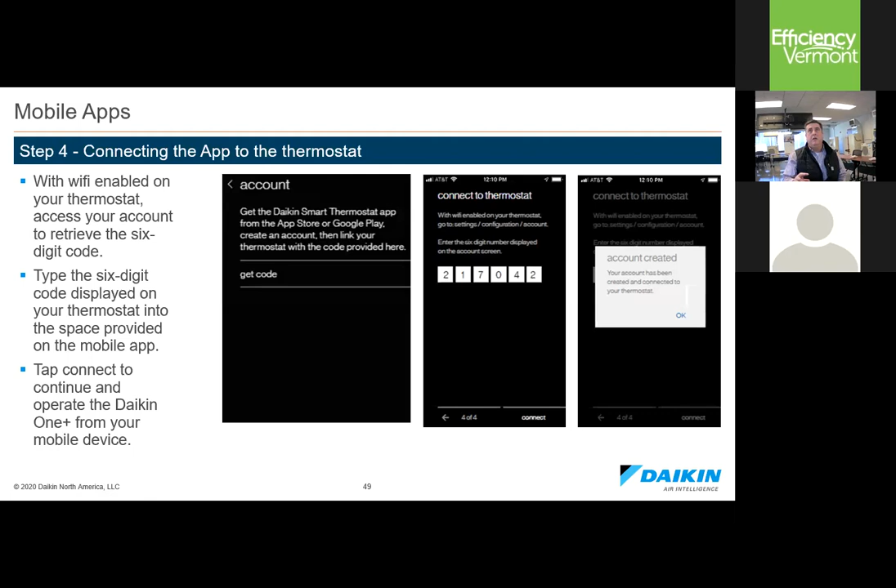Then they're going to add the thermostat location, and the app is going to find that. On the controller, you're going to be able to put in the same code to link the two, and they're ready to go. The app will pretty much mirror everything that the controller can do, so you can control it from anywhere in the world, almost like you're standing in front of it.

So that's the installation. I'm going to go over a couple other points, but that is a simple installation of the Daikin One+ stat. Very easy to use, very easy to install, and mostly very easy for the homeowner to use.

Any questions before I move on? Hold on a second, there's a message here. Hi Tom, we have a question.

The question is how the homeowner can switch to emergency heat. That's a good question. I know that if the outdoor unit does go down, the controller will automatically swap over to whatever source is working. To manually do that, I believe you'd actually have to go and change the setup. But if there's actually an emergency heat situation where the outdoor unit or the backup heat wouldn't run, it would automatically swap over to whatever source is working. I can get clarification on that, I haven't been asked that before. That's a good question, thank you. I'll find out the answer, if there's another way to manually swap to emergency heat.

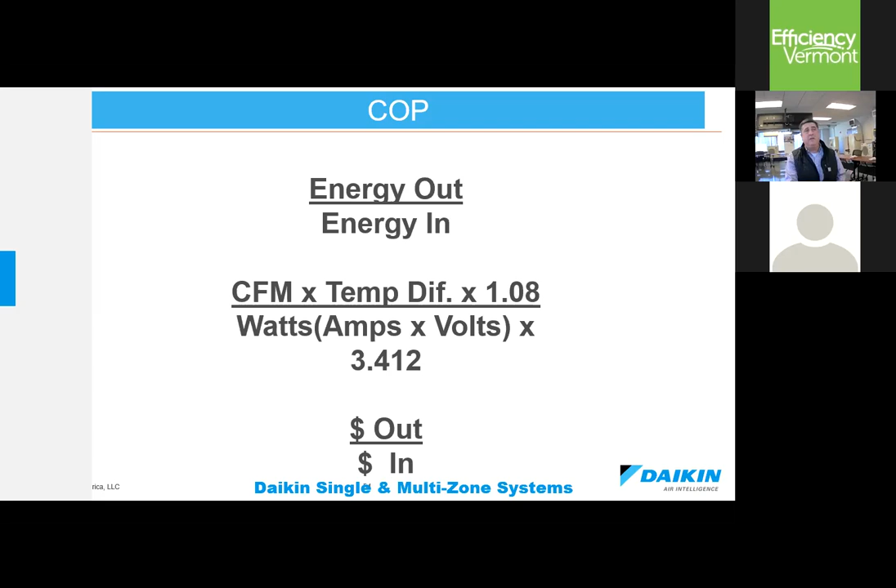One of the reasons we do sell heat pumps, and I bring this up because it should be brought to the forefront since it's really important, is good to show where in our data to get this information. I like talking about COP, it's my favorite rating because it's simplified. I can walk up to almost any unit and with a simple formula and the right tools figure out what it is. We can also put that to energy in, energy out, or dollars in, dollars out. So that's why I like to explain heat pumps and savings to homeowners using COP.

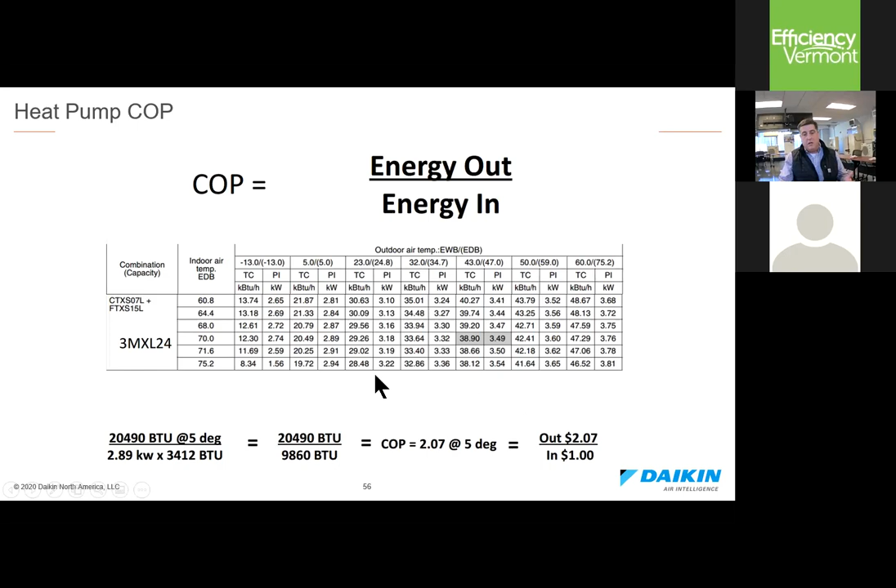So a big savings if we can continue to maintain the heat. This is going to be based obviously on the load of the house.

It's important, right? Everybody thinks it's a lot colder than it is, because they always remember the worst case scenario—I'm sure you go through this a lot with your customers. When we look at Burlington, Vermont, basically 4,682 hours below 50 degrees, and the design temperature for Burlington, Vermont is -11. It's pretty low.

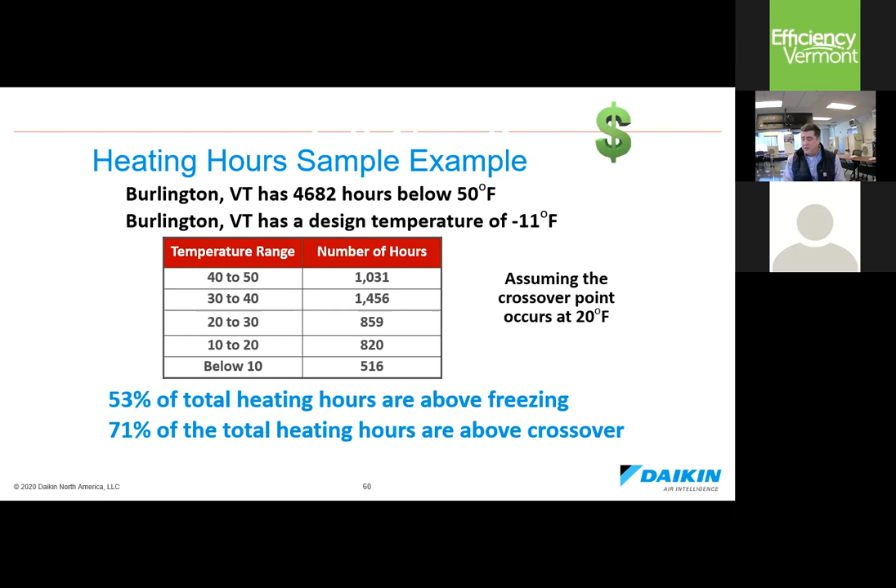Same questions. Oh, here we go—I was frozen there for a second. Sorry about that. All right.

So a couple of ways we could also look at setting up the equipment, making sure that we have the right line sizes, especially on a multi-system, to make sure we have the correct matchup.

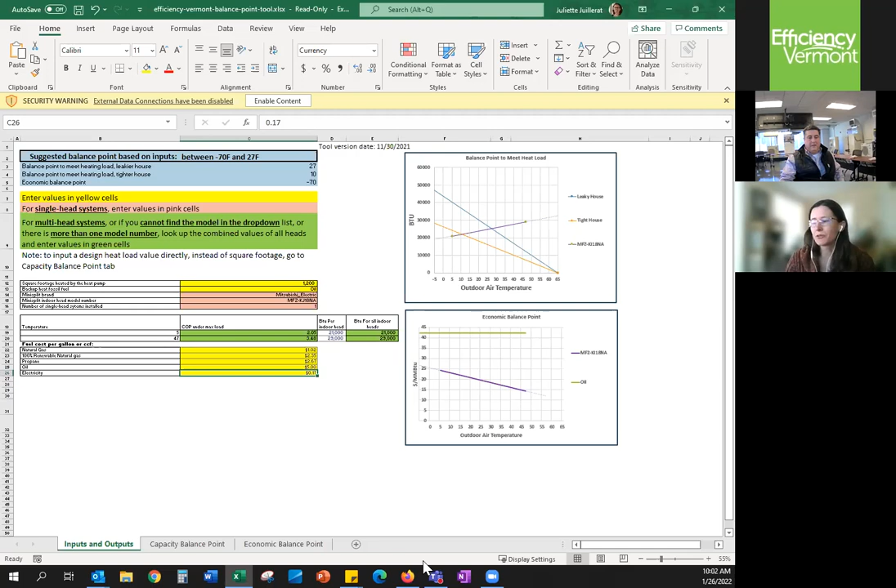Another way to look at it is the graph at the bottom, looking at the economic balance point. So if you change the cost of oil, say to $5 a gallon, that will change the temperature at which the homeowner will start saving money. So again, take a look at the tool on the webpage and play around with it, see if that's helpful in determining a good crossover temperature. I hope that's helpful, Tom, go for it if you want to add more. I just wanted to make sure everyone was aware of that tool, because I think it could be useful to get started on understanding what's a good temperature.

And yeah, absolutely, especially because a lot of people up in the Burlington area may be on natural gas, and it's a whole different balance point than if you were on propane or oil. Right. So I'll stop sharing and pass it back to you. I just wanted to make sure everyone was aware of that resource on our webpage.

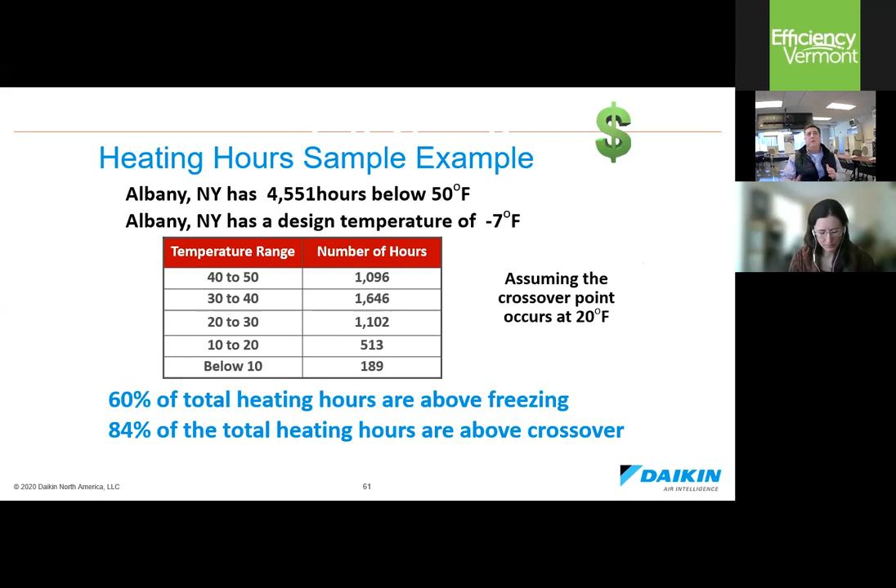And actually, let me go back to that screen since time. Yeah, I mean that crossover point too, it could be here, but all I'm saying is it's just crossing over from one fuel to the other. If you look at the charts, go back.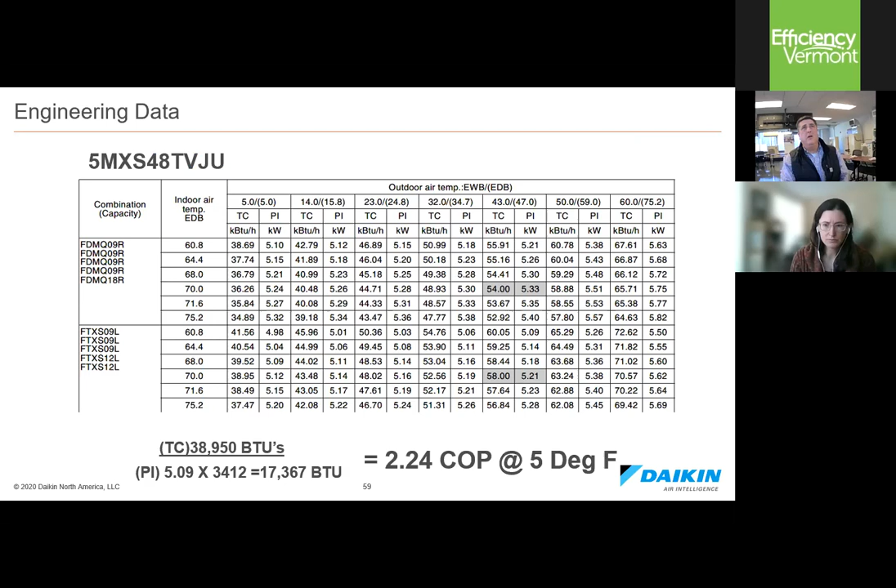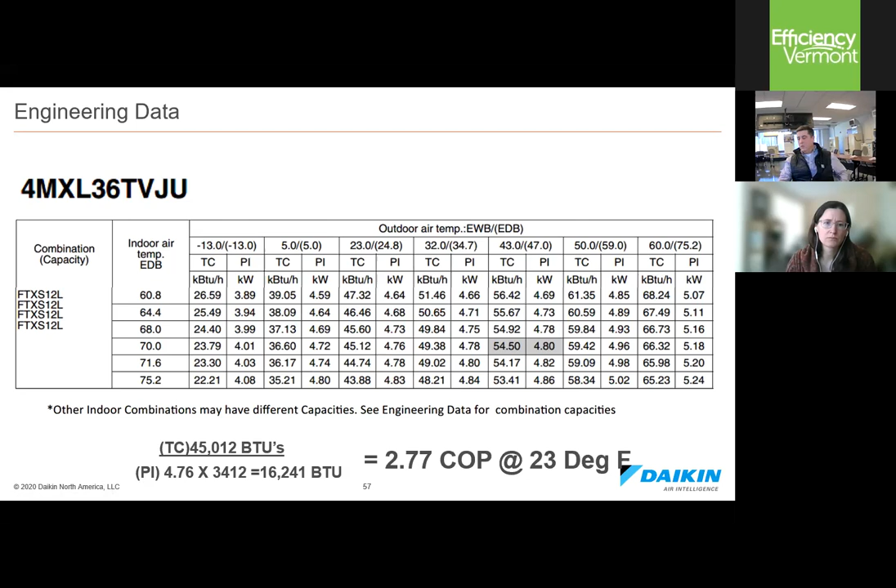Especially with the 4MXL, it's really based on that load. Do I want... this is that crossover point. With the 4MXL, is my load above 4 tons? I'm dropping off at this point where I might not be able to make it. Say my load is 4 tons, I can swap over to the fossil fuel at that point. Or if it's lower, if it's 3 tons, I could be at 5 degrees, or 2 tons, whatever they need. That swap over point is going to be based on the building load. When you do your load calc, it's going to determine where you're going to be swapping these over, and what fuel you're using, where you're going to be really stable. Hopefully that makes sense.

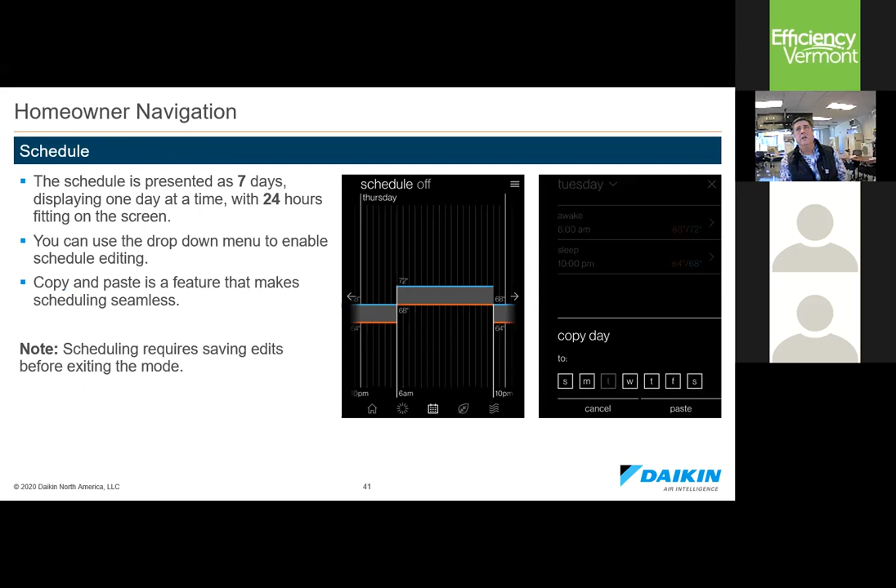So we can set these up to be able to have this, if you wanted to do an overlap on these controls, right? We can do that. Typically we might not do that with a furnace and heat pump—a coil on top of a furnace, we'd want to swap that over. But with separate sources, say it's a wall mount using forced hot water baseboard, then yeah, you could optimize the heat pump and add it as a supplemental and let them overlap each other. So that's possible, it depends on how you come into this screen and how you set it up. Does that answer the question, Bill?

I'd like to see how it's done in the installation manual. I wonder if you could email me a copy. Absolutely, yep. Bill, we have your email address, so we'll share that with Tom. Okay yeah, that'd be great. I'd be glad to do that.

My reasoning is, over the decades, balance point is when the heat pump is unable to maintain the load, and auxiliary would supplement it. Cutoff point is when it's decided that it's no longer economically correct or even comfort correct to operate the heat pump, and the heat pump is off and auxiliary becomes 100%. Right, so those two points you would make clear to the customer as the conditions where each would be implemented.

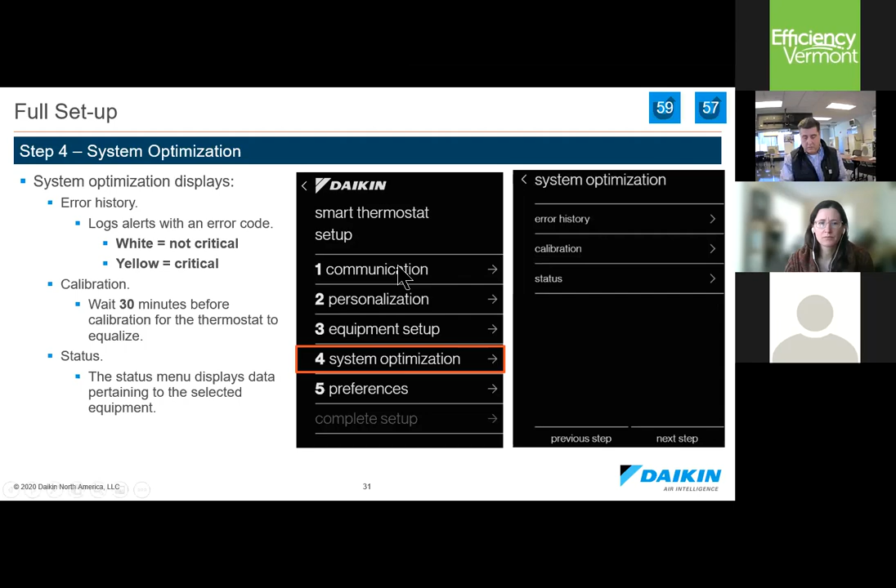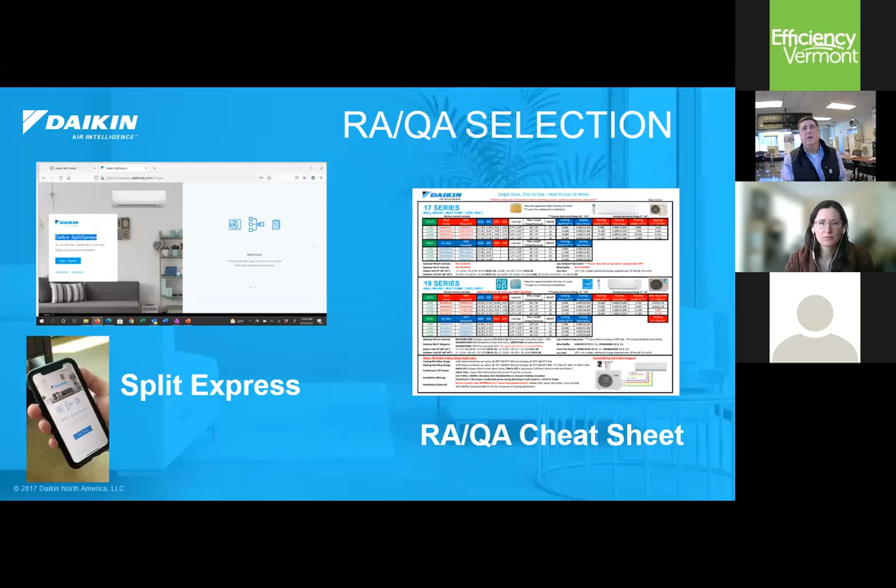All right, we're almost done. I'm just going to go quick. Typically, if you were sitting here, I'd be handing you out an assessment. Obviously, I can't do that. Again, I wish I was in front of people. I like doing presentations, seeing people's faces.

And these Zoom calls are sometimes tough. So I'm going to run through and we'll give you the answers. When commissioning the Daikin One+ through a full setup, what steps need to be reviewed before completing setup? That was pretty easy, right? All the steps.

If the unit does not have an S21 interface, you must use an interface adapter, and that is true. The measurement between data line 1 and 2 should read - and again, this is something I recommend to do when you get on a wall, get it wired, to make sure that your wiring is right before you go too far down the road. And the answer is 0.6 volts DC.

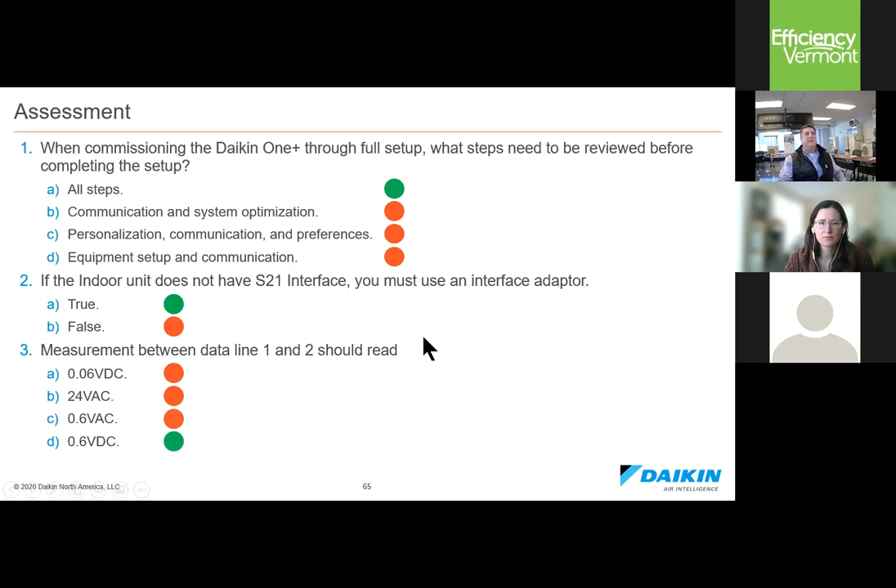That one's an easy one, right? 5 feet off the wall. Yes, it can be affected by radiant heat.

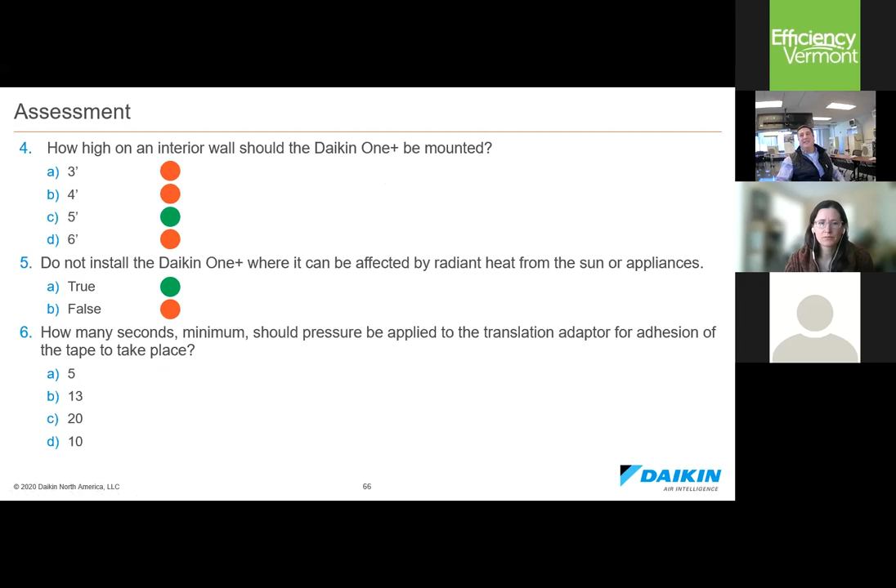How many seconds should the translation adapter, right, double-sided tape, is 20 seconds. Yep, the power LED will flash green if wires are reversed. You shouldn't use screws on an indoor unit.

This is really important. Which setup tab allows you to add equipment? Because if we already have the system set up and then we added later on the backup heat, we can go into the equipment setup.

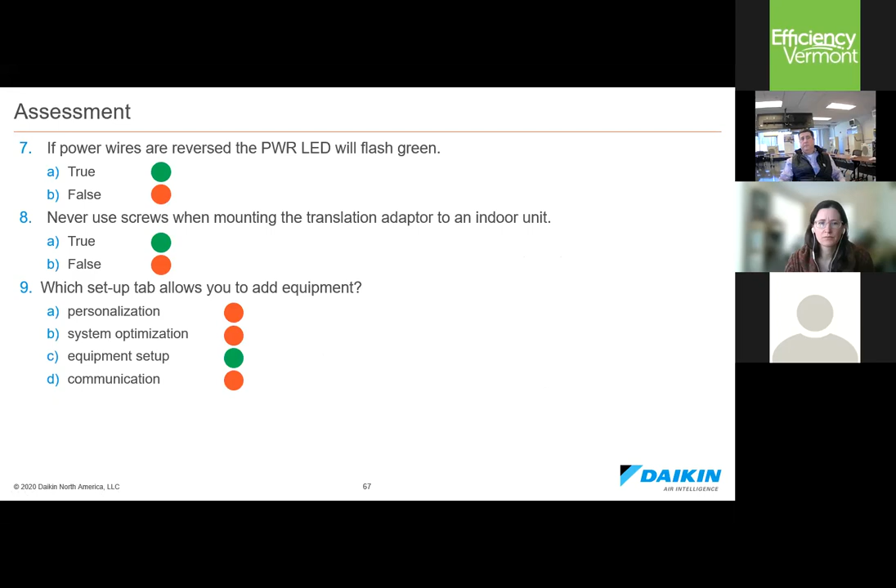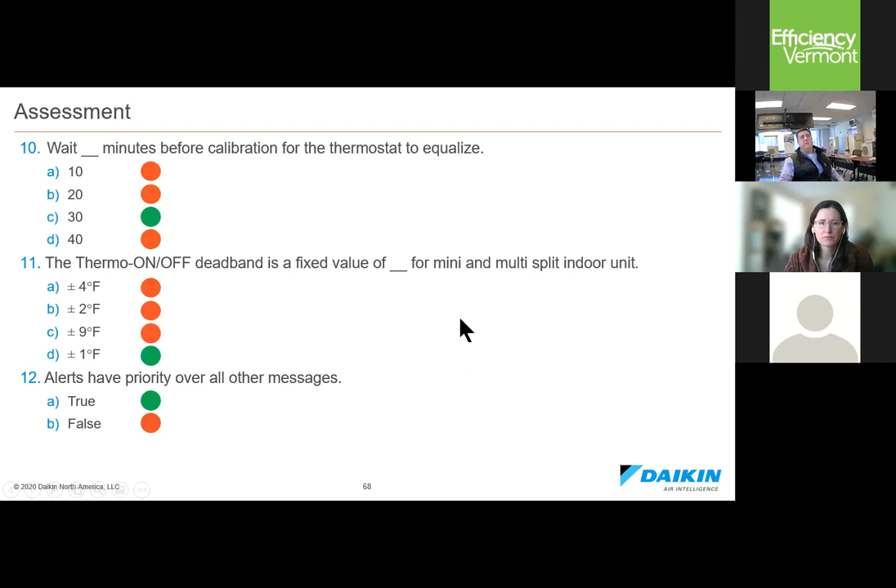Should wait 30 minutes for calibrating the thermostat. The Thermo-ON/OFF deadband is a fixed value of 1 degree for mini and multi split indoor units. Alerts have priority over all messages.

You want to look for the check boxes as you're going through all the setup, right? There are all those screens. They're going to check off as you go along.

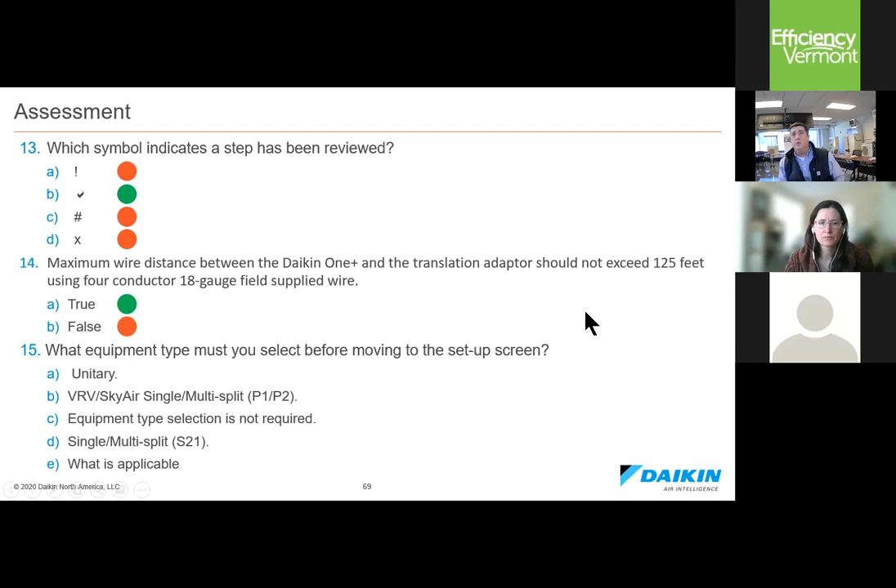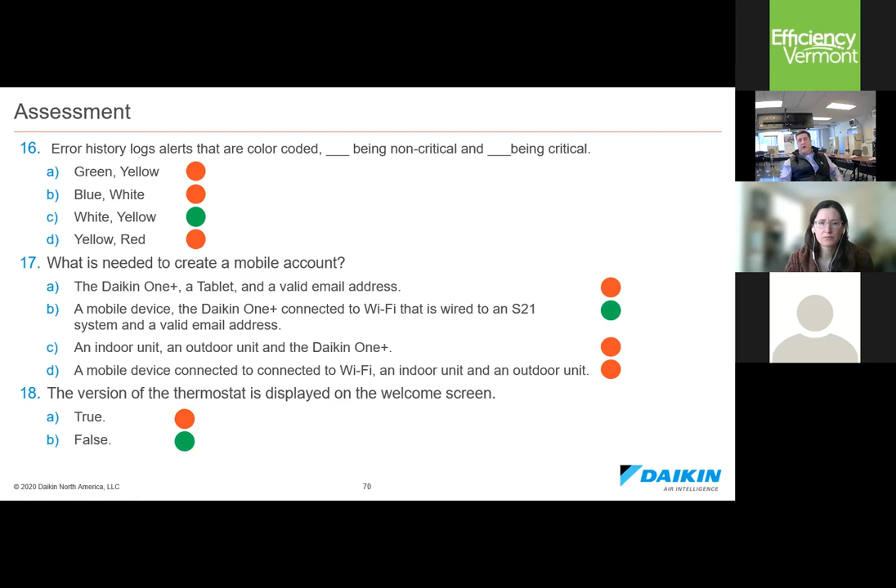Any further questions that might have come up? If not, that's all I have for today.